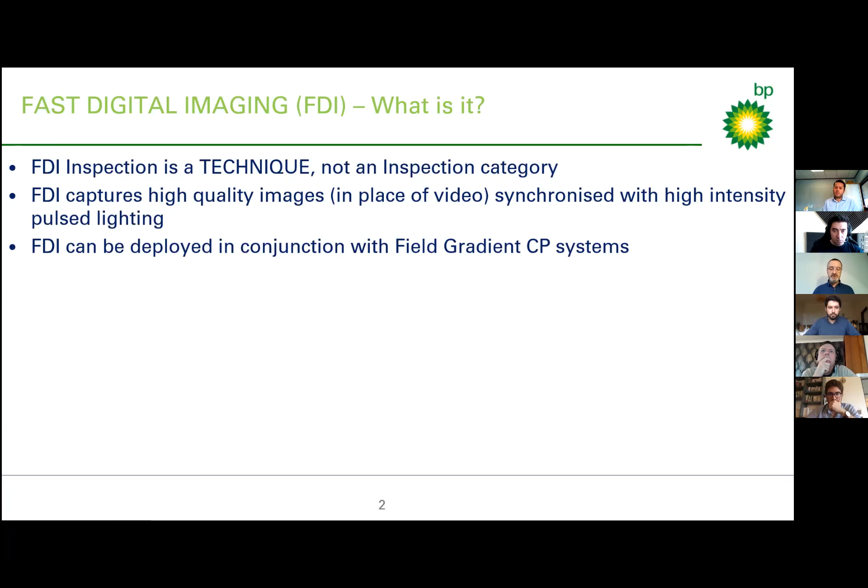So what is fast digital imaging? Fast digital imaging is a technique, not an inspection category. Fast digital imaging captures high quality images, stills images in place of video, synchronized with high intensity pulsed lighting. Fast digital imaging can be employed in conjunction with field gradient CP systems. The point being field gradient is non-contact, so you don't have to stop the inspection program.

Fast digital imaging can acquire data at up to 8 kilometers an hour. Data is acquired in a single pass, processed and reviewed after the acquisition cycle. Fast digital imaging may be configured for general visual inspection, referred to as GVI, or fast GVI, fast general visual inspection, by adjusting sensor configuration and geometry.

Fast digital imaging is ideally suited for fast ROVs, AUVs, work ROVs, or remotely operated combination unmanned surface vessels and underwater vehicle systems, which is certainly the perceived future direction. And fast digital imaging, because of the nature of the data that's acquired, is ideally suited for automated event and anomaly identification and classification.

So within BP, and I think within the industry in general, there's 5 inspection categories: pipelines, jackets, risers, and hardware. And each of those has a component that may be requiring horizontal or vertical inspection, and also operations within 500 meter zones. And obviously all water depths from the beach to the deepest asset.

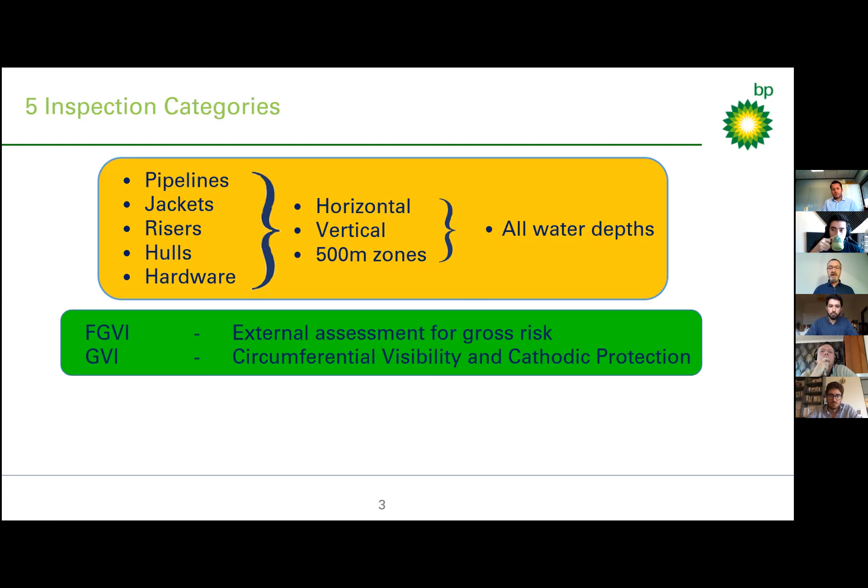So fast GVI is roughly an external assessment for gross risk to the asset, whatever that asset might be. Whereas GVI, a general visual inspection from a pipeline perspective, requires a much greater circumferential visibility of the pipeline or the structural member, and potentially monitoring of the level of cathodic protection that's afforded to the asset by the protection system, whatever that might be, anodes or impressed current. And fast digital imaging has become BP's preferred method for performing underwater asset inspection.

So BP now has a specification that outlines the minimum requirements for fast GVI and GVI, and they're quoted in o'clock positions rather than coverage. Fast GVI requires a minimum of 9:30 to 2:30 o'clock coverage. That essentially means about the top 160 to 170 degrees of the pipeline plus seabed either side.

GVI requires a greater degree of circumferential visibility, 8 o'clock to 4 o'clock is quoted in the documentation now, but also sufficient overlap information to create three-dimensional models, either point clouds or surface models. And again, the pipeline either side, the seabed either side.

So BP has now a track record of performing 6 fast digital imaging campaigns globally, and globally meaning North Sea, Trinidad, and Azerbaijan, Georgia, and Turkey, or the Caspian region, with varying degrees of coverage and speed acquired.

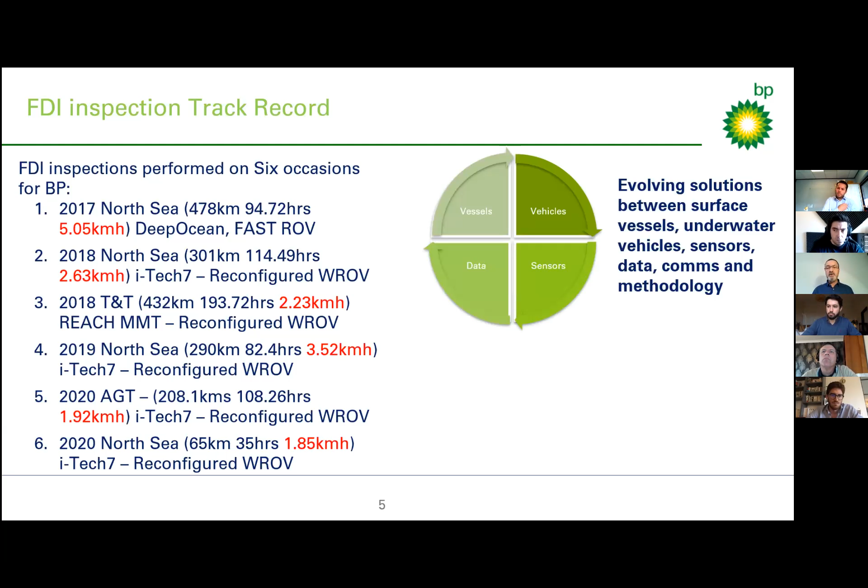And we see the still evolving solution between the type of data that we require, the sensors that we need to acquire that data, how we mount those sensors on the underwater vehicles, and potentially how we operate the underwater vehicles from surface vessels, manned or unmanned. And this is where a lot of remote operations comes into the equation.

Fast digital imaging delivers quality products that we are trying to, through continued use, standardize and normalize within the industry. And BP now is certainly not the only company that's using fast digital imaging as a data acquisition methodology.

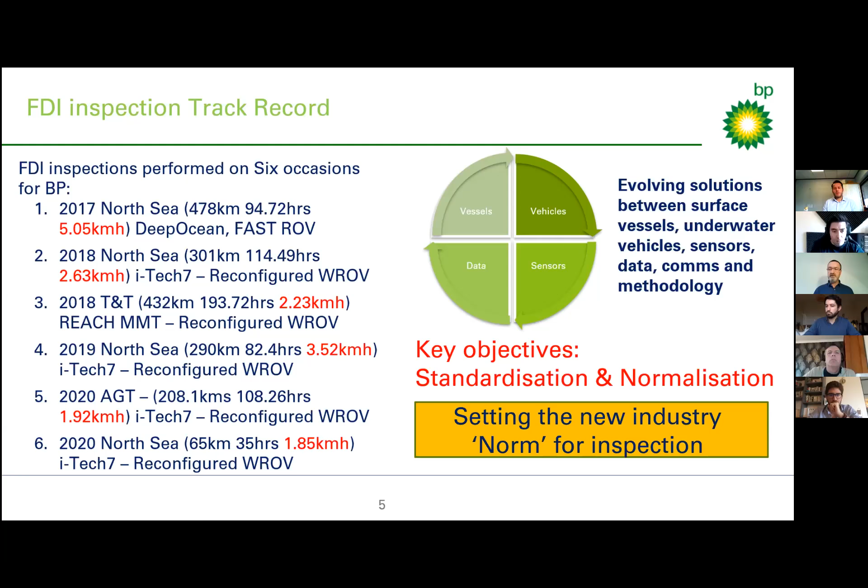Effectively, we're aiming to set a new norm for inspection, moving away from videos, contact CP, and much slower, laborious data acquisition methodologies. Fast digital imaging also impacts BP's vision within the low carbon agenda.

Within the 6 campaigns conducted to date, 62 vessel days have been saved employing fast digital imaging technology. That equates, on a very average 12 cubes per day, to 789 cubes of diesel saved, which equates to 2,052 tons of carbon dioxide not released into the atmosphere.

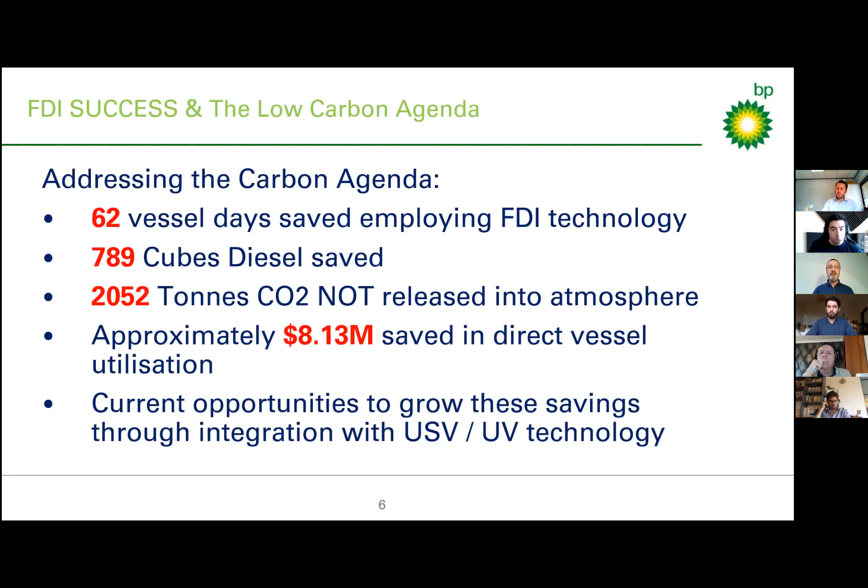Additionally, the saving of vessel days equates to approximately $8.13 million saved in direct vessel utilization. And there are current opportunities to grow these savings through integration with unmanned surface vessels and underwater technology, integrated underwater vehicle technology, and the whole sphere of remote operations.

So a quick outline now of the types of inspection that we require, fast GVI in this case, and the type of history that we've got.

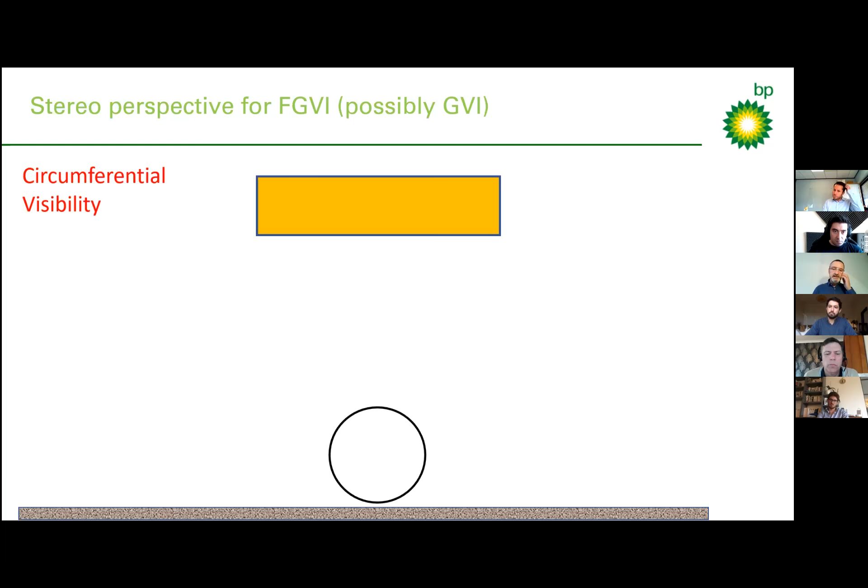This is largely not to scale, but the baseline between the port and starboard acoustic sensors is about 90 centimeters, less than a meter. One of the benefits of an acoustic system is that we can see the pipeline without needing a viewpoint from 2 perspectives.

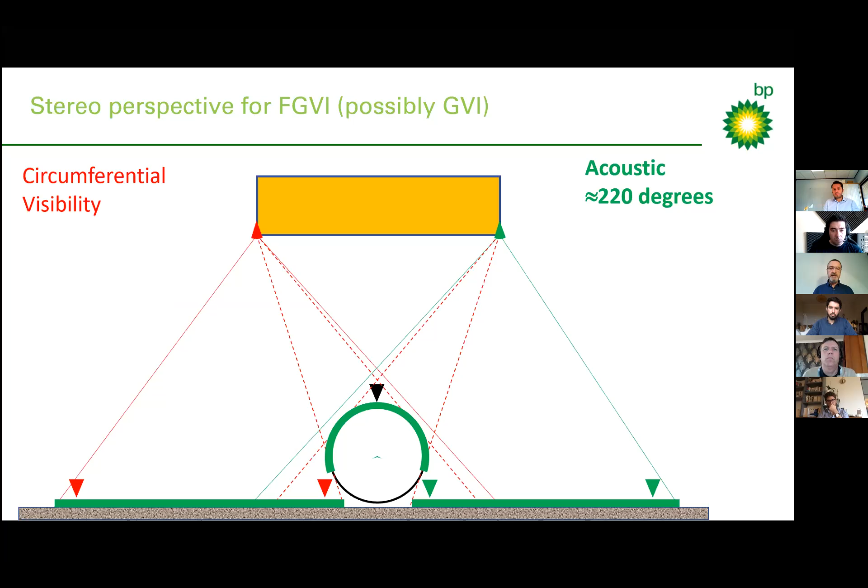So the acoustic coverage with a pretty minimal baseline and a low flying altitude is still fairly good with an acoustic multi-beam system, about 220 degrees. You can pick up your 5-point profiles quite adequately using that technology.

Photogrammetry, i.e. with the stereoscopic images, if the cameras are placed in the same location, can actually only yield a far smaller field of vision, a model. The reason for this is because you can only see or model what both cameras can see.

So if you just take the rough perspective of the port and starboard cameras there, you can actually see by the dotted lines that there's a minimal area of overlap of both cameras.

Stills imagery, also taken from a single perspective, i.e. in this case the starboard camera, is distorted and offset from the model. So although we can get great results with this lower, shorter baseline between our sensors and a low flying altitude, there are some drawbacks to it.

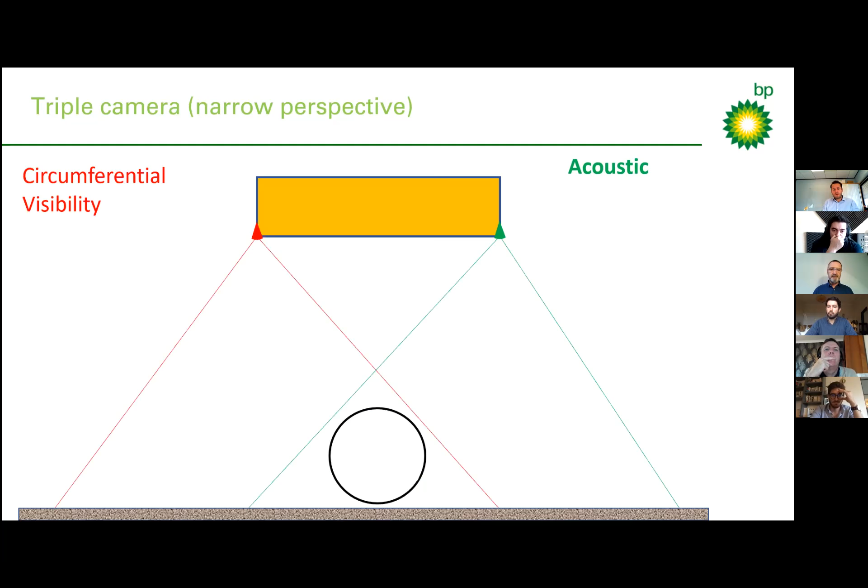So if we now look at how we can improve that, which is now, instead of a stereo, we've got a triple camera perspective. So we've got the same acoustic coverage, same 5-point files, but this time, if we put a center camera in it, we've actually got much greater photogrammetric cover.

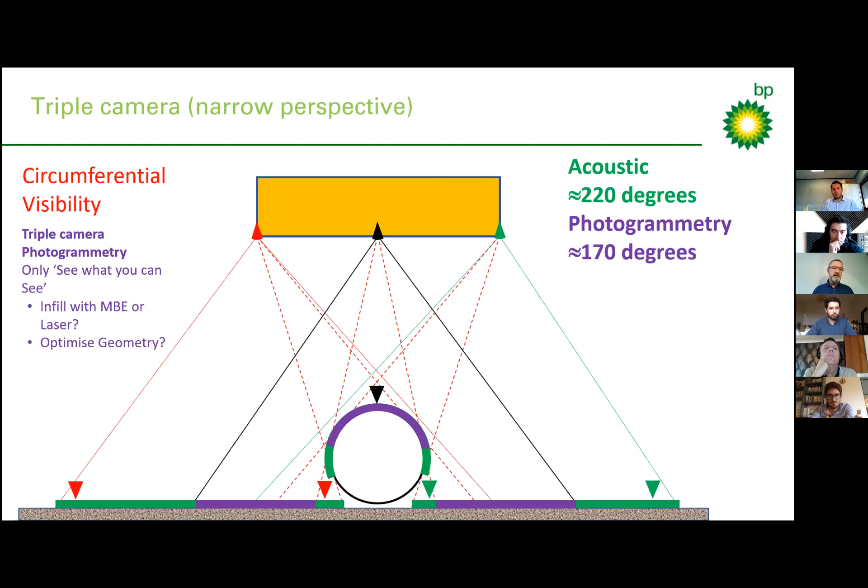So we have a triple camera, and you can see the field of view, the overlap between the images is greater using triple camera. It's in the order of about 170 degrees. And again, the motto here is you can only see what you can see.

The stills mosaic and imagery mosaic for the 2D geotiff, basically the plan view, is now a lot more symmetrical, meaning there's far less distortion, and the overlap is significantly improved to give you a much wider corridor of visibility.

What the challenge we still have with this rather short baseline, this approximately less than 1 meter baseline, is actually looking underneath the pipe to see what happens in the transition zone between the seabed and the pipeline, as indicated by the red circles. So the way we improve our visibility here is to, bear with me,

broaden the baseline to what we have determined through experience to be about 2.5 meters. We've still got the triple camera perspective. The multi-beam coverage is adequate, but with the larger perspective, we get slightly more photogrammetric coverage for derivation of photogrammetric extracted point clouds or surfaces.

We also used pulse lasers and lighting at the outer camera locations to get more coverage in this area, and we have a stills synced forward camera. A lot of this is to do with providing the pilot information, because now the pilot is not navigating through video, as they could potentially be above the pipeline, out of visibility.

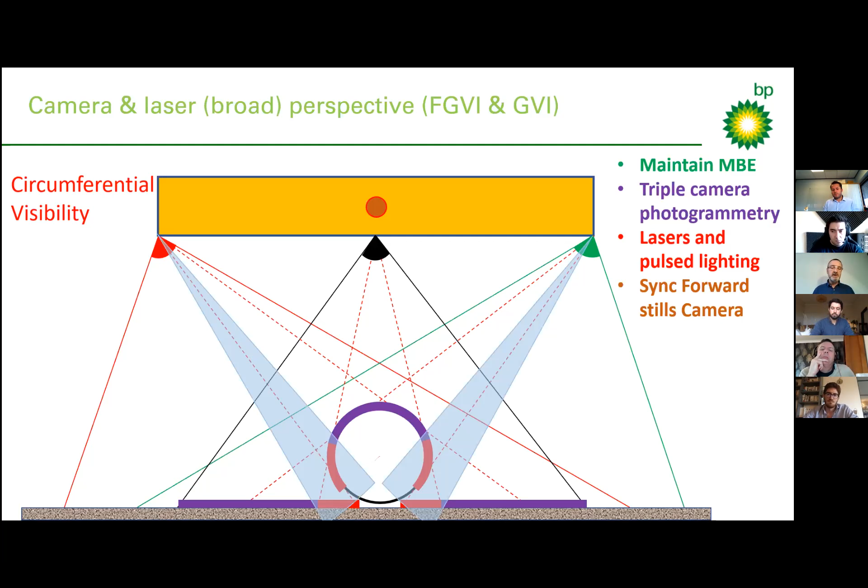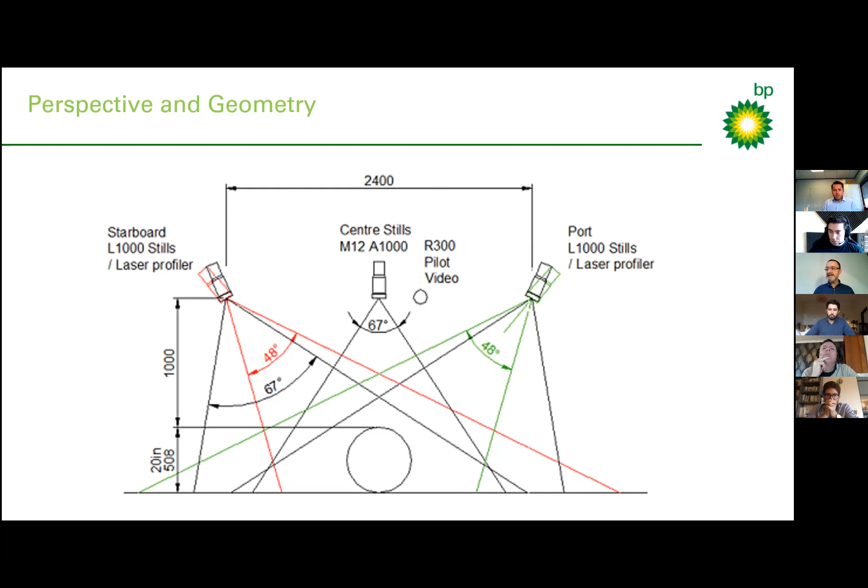We're also looking at how we're going to move this technology into unmanned and remotely operated systems. This is a schematic of the actual setup we use for our inspection. You can see the outer port and starboard cameras are tilted inwards.

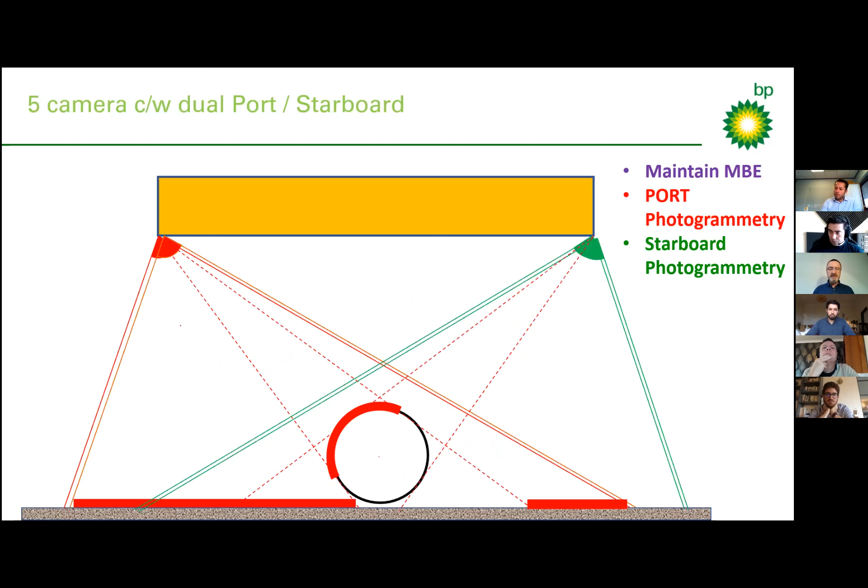There's one scenario that hasn't made any industry ground yet, but we're looking at it for good reasons: a 5-camera dual port and dual starboard perspective, which removes the need for lasers. The port camera gives adequate port stereoscopic visibility, the dual starboard camera gives good starboard photogrammetric coverage, and the center camera gives great 2D overlap for creating the overall geotiff.

So this geometry provides everything we need, full coverage, which allows us to go full velocity through the inspection cycle, plus a synced stills forward camera.

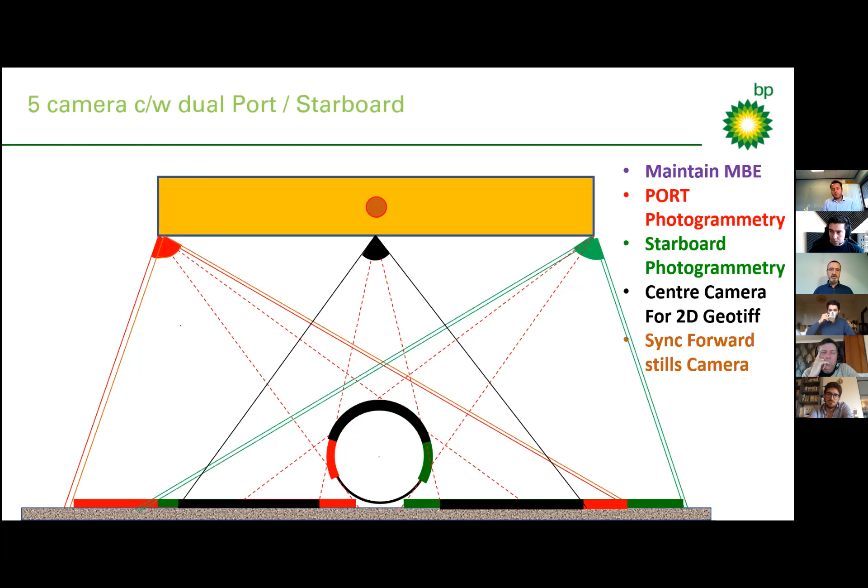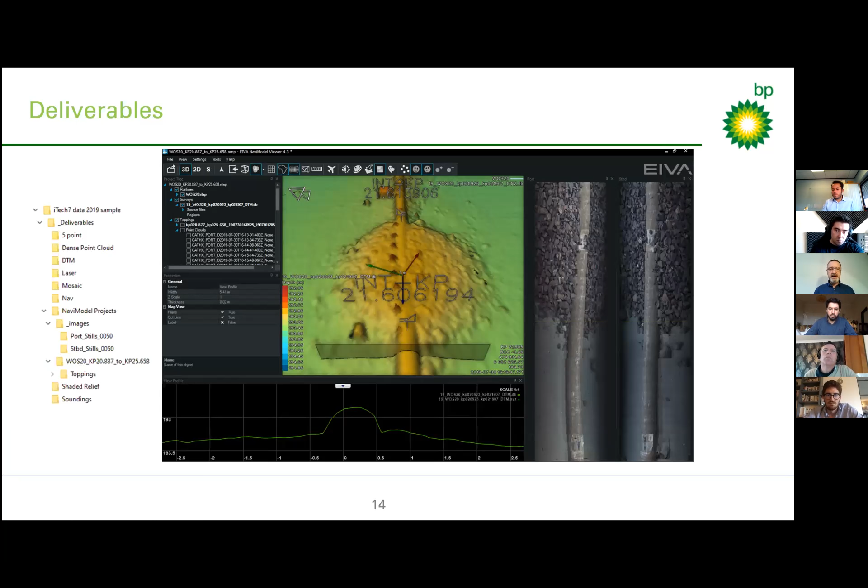The deliverables are in a single format accessible within the BP corporate data store, but also allow the user to interface, gather the data, and look closer at events and anomalies as required.

The detail in this extracted points cloud model is phenomenal, very high resolution, high quality data. The 2D georeferenced ortho mosaics are very highly resolute as well, probably more resolute than I'm actually presenting on screen. As you can see, just zooming into a starfish in this case.

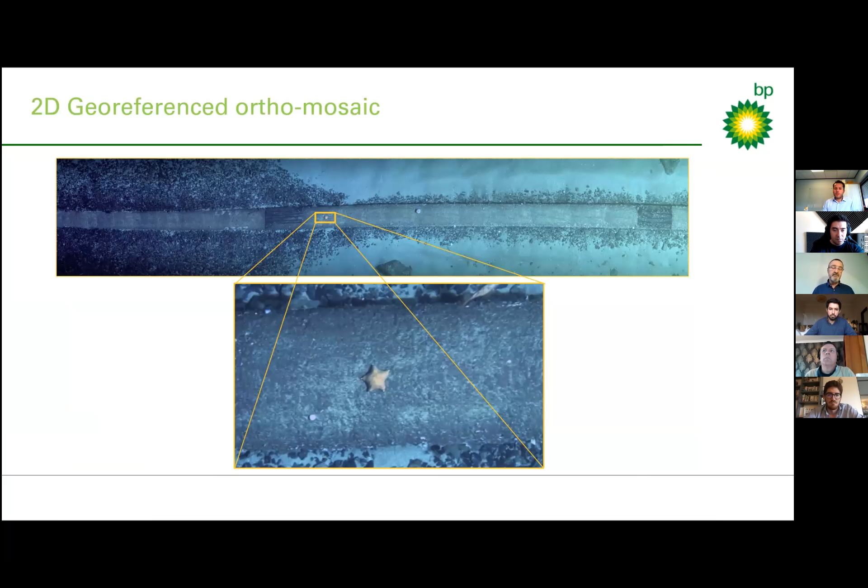If that was damage or debris, as well as potential scarring, anchor scarring, or dropped objects parallel to the pipe, it's easily identifiable and accessible and viewable within almost anybody's corporate data store. We've moved this on to structural inspection as well.

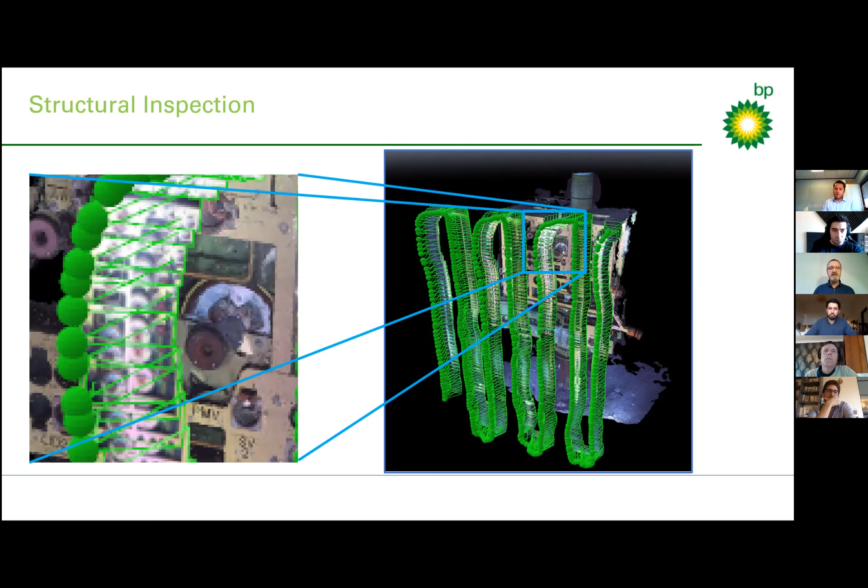Again, we have a three-dimensional model in the background, and each of those green dots represents an image. Unfortunately it's low resolution because it's a poor screen capture, but you can see the principle is the same, for a vertical inspection.

For vertical inspections, we're looking at techniques such as visual SLAM, visual simultaneous localization and mapping, and structure from motion, because the relative precision between cameras isn't necessarily derived through positioning. That might be the first iteration, but it's actually defined by identifying common points within each image.

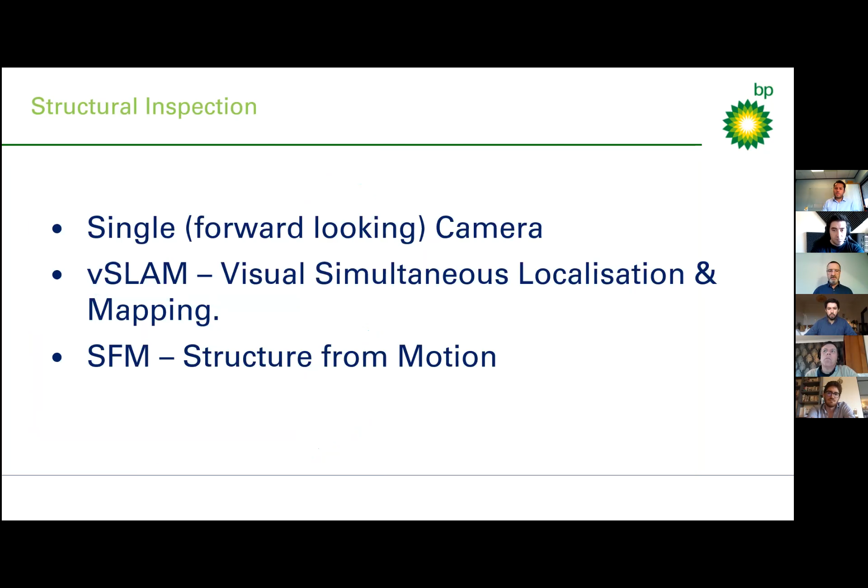A couple of minutes, Eric. A couple of minutes. Thank you, Walter.

Primary takeaway messages: fast digital imaging is BP's preferred technique for inspection, across all categories. Fast digital imaging is a data-focused Renaissance technology, meaning it meets requirements through detailed discussions with integrity engineers and asset owners. It delivers products compatible with BP's, and I suggest other operators', corporate data stores. In BP's case, this is the OneMap environment.

Fast digital imaging and USV, unmanned surface vessel systems, lower the carbon footprint and lower risk by removing persons from the field. Ultimately, BP will review and implement advanced and alternative inspection techniques to further increase inspection efficiency.

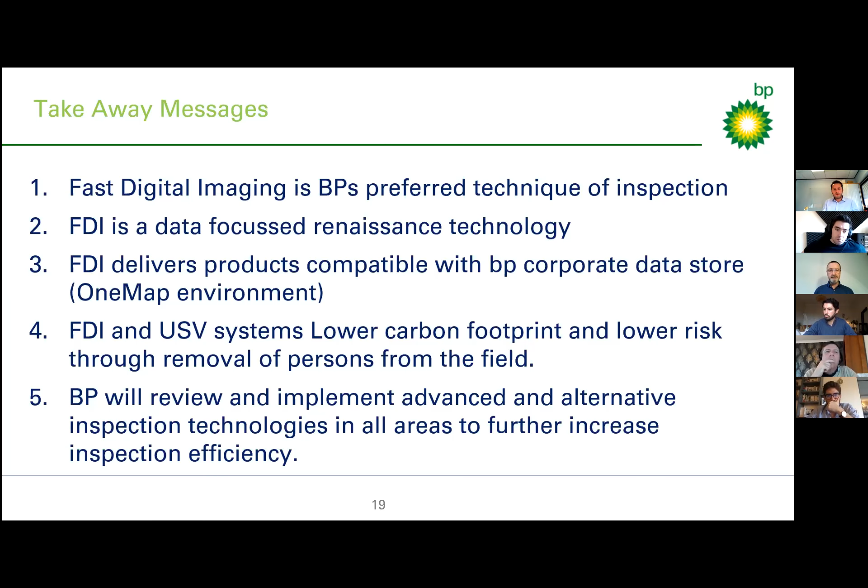Thank you very much. Time for questions.

Excellent, Eric, thanks very much. Very slick and good timing. Daryl, I don't know if you want to kick things off, have you got some questions? I've got a few myself, but maybe you want to have a stab, and we have our other presenters who may have a question or two. So we're going to open up to the floor, and maybe we'll start with Daryl and see what he has to offer.

Yeah, so Eric, very good presentation and very interesting. I'm interested on the lighting side, because you've shown some fantastic images. Is this strobe lighting? Is there any challenges with providing that lighting? And then also, can you discuss the benefits and disadvantages of using lasers over additional cameras, in association with the lighting?

Great questions, both of them. And you're right, I touched on them, but I certainly didn't give them adequate time through that discussion.

Lighting is absolutely critical, and that's why it has to be synchronized. Every image has a synchronized pulsed high intensity strobe lighting. I don't know the actual lux intensity of the light, but it is adequate. That is actually what delivers the result, not just having a high resolution camera.

You really have to get that lighting pulsed at the same time. The challenge with lighting, the reason it has to be synchronized, is because the lighting is relative to the perspective of the camera being used. For example, if you're out of sync, you flash on the starboard side but the camera takes on the port side, you'd end up creating a shadowing effect and significantly degrade the image. So lighting is key, absolutely key.

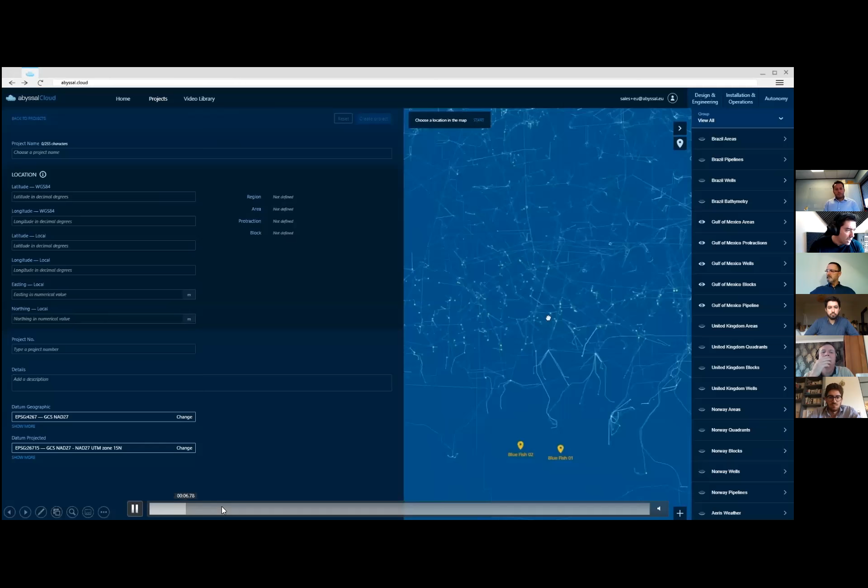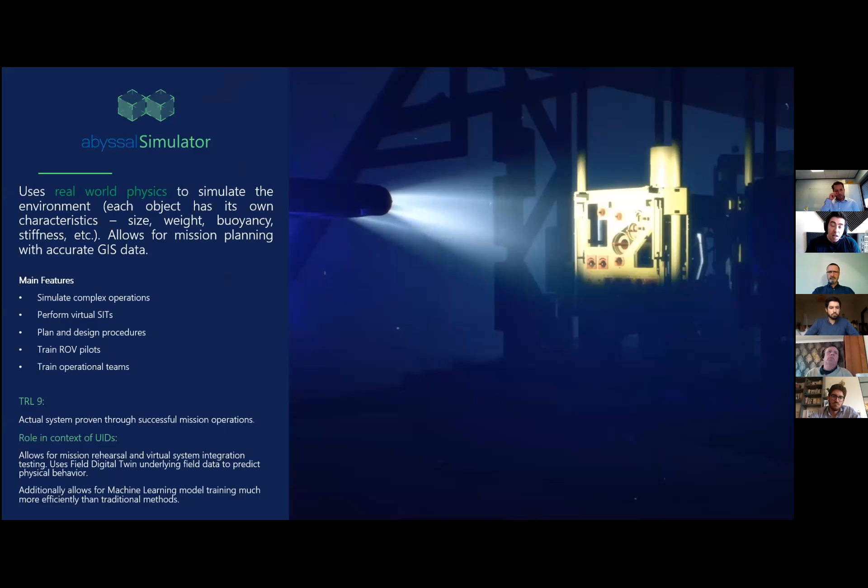So moving a little bit on, this is how now we have a digital 3D version with GIS capabilities very accurately. Now we can move on into the simulation component. This is where we plan operations before even going offshore. We're using a physics engine, based on that GIS and CAD data, and also data that we extract from the AI components.

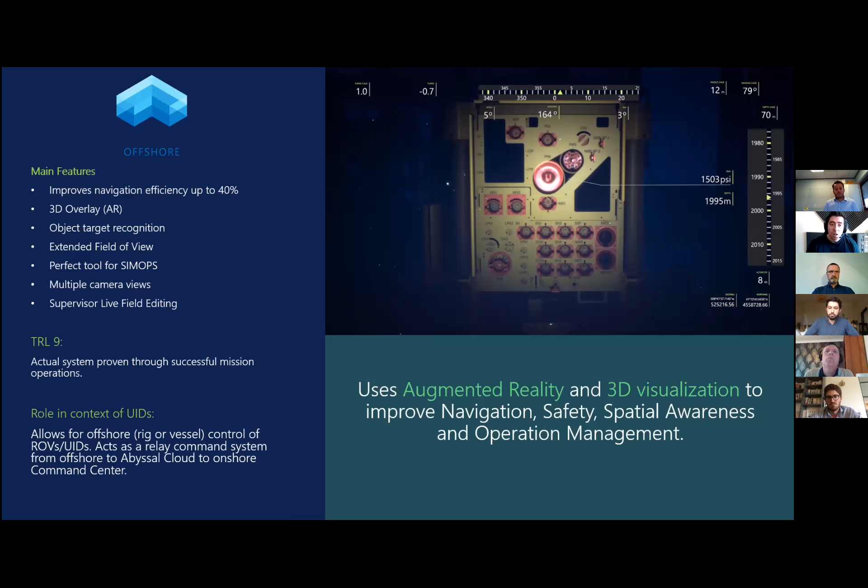When we go into execution, this is where the operation actually takes place. We have a kit that's installed near the ROV control room. This is where we do most of our operation management, but also that's where we correlate video and data sources with the telemetry. Those kits are sending information via satellites to our cloud, and inside that cloud, the data is being correlated together, and this is where the AI comes in.

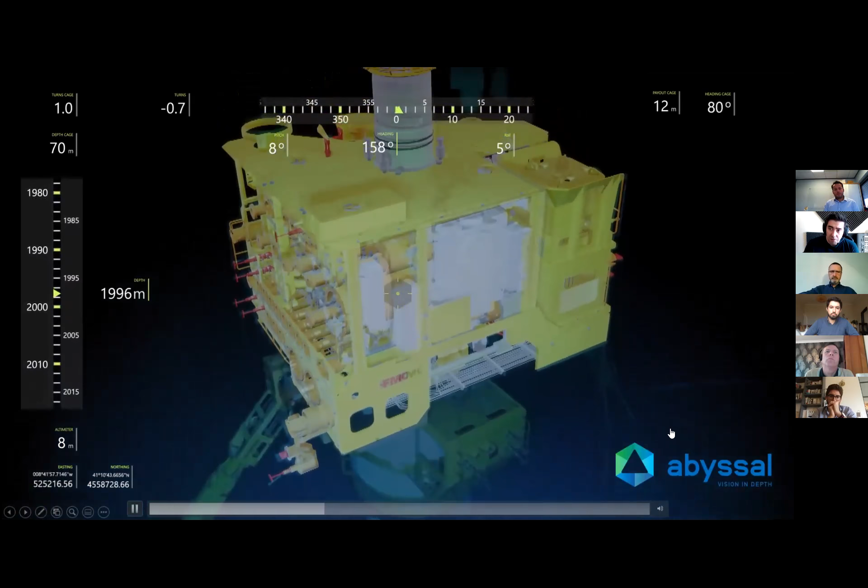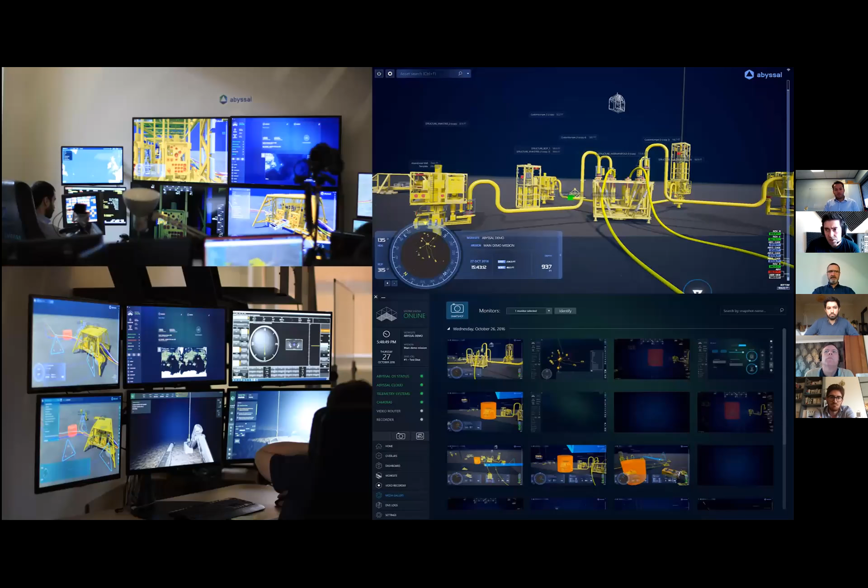So the capture process is, yes. So we're doing the operation live offshore. How can we extract data that's already on the cloud? For us, it is a use case of how we use the cloud system to create command centers for our customers. This is an example in BP. This is where we were monitoring an unmanned surface vessel that also deployed an ROV, and we were tasked with monitoring all of this operation.

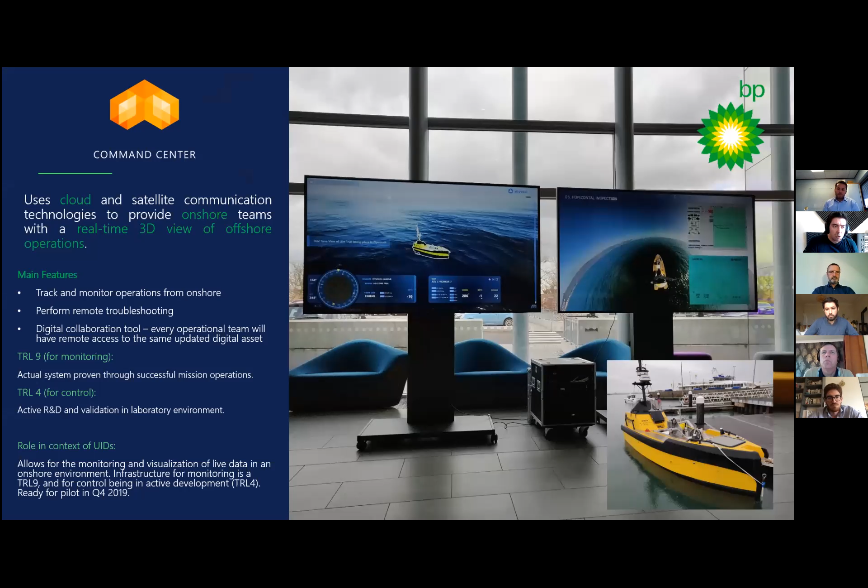So moving on to the processing component and subsea artificial intelligence. What we created was a subsea.ai platform. This is going to be a marketplace for machine learning models and annotated data. It's also going to be a faster data annotation platform. And why? That's because we need well annotated data and lots of it, and building those models is challenging.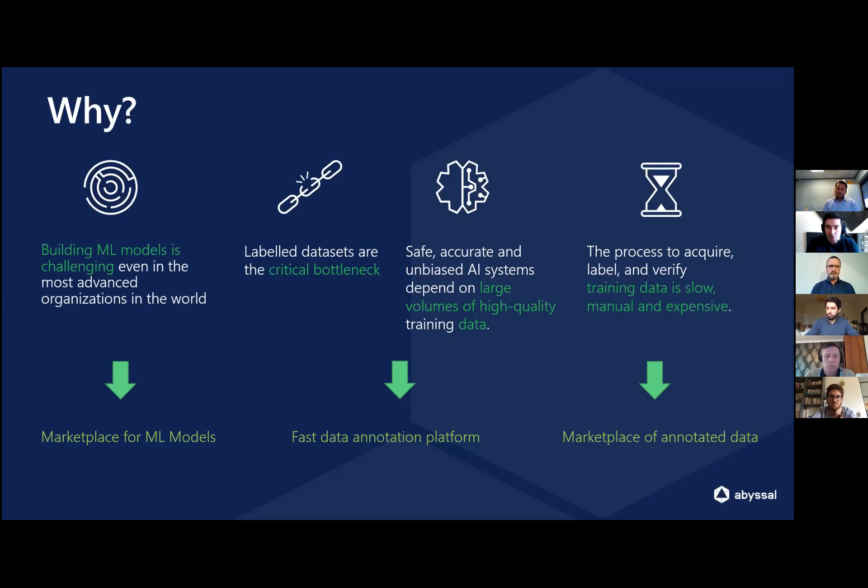So we're going to allow our users to access those models, but also the critical component, the bottleneck of creating AI models, is labeling and annotating data. So we created ways of making that much faster, actually 80% faster in training AI data. So this is how we do it in that subsea. I'll give you lots of examples after these slides, but we essentially collect the data by post-process.

We can take legacy videos from our customers, so essentially terabytes of videos, and we then create tools for our users to annotate, to create all sorts of different models. And then we help our users train the model and contextualize the result in a 3D environment. That could be volumetric reconstruction, which I'll show you. So these are the examples that we've done in the past in all sorts of situations.

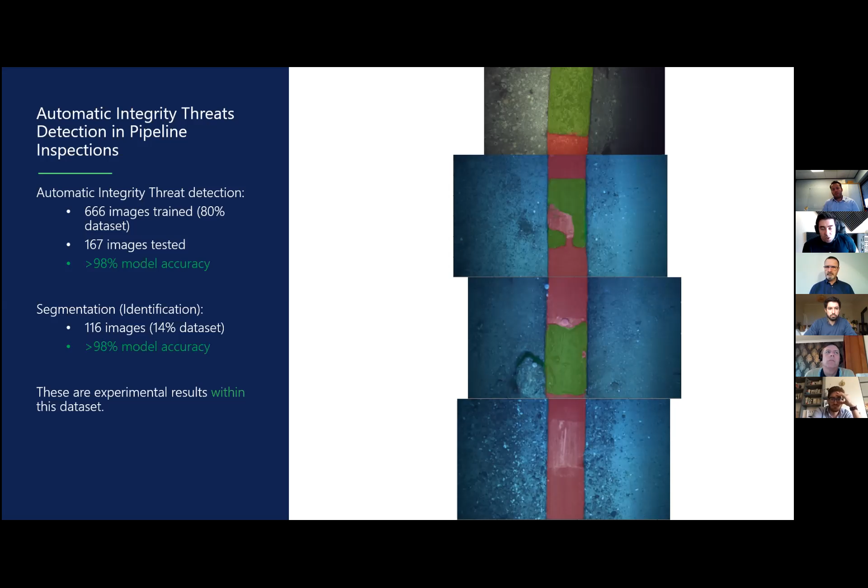One example is automatic integrity threat detection. In this case, we are detecting with 98% model accuracy integrity threats in a pipeline inspection. So we're saying, is there or isn't there an integrity threat in this image? But we're also segmenting with 98% model accuracy where that asset integrity threat is. So green is bad, red is good. You'll see the coating on that pipeline as an integrity threat.

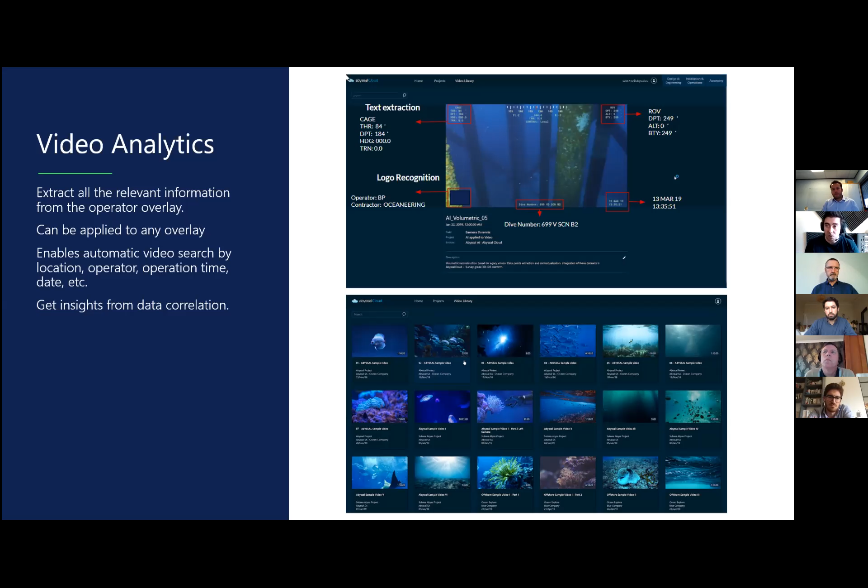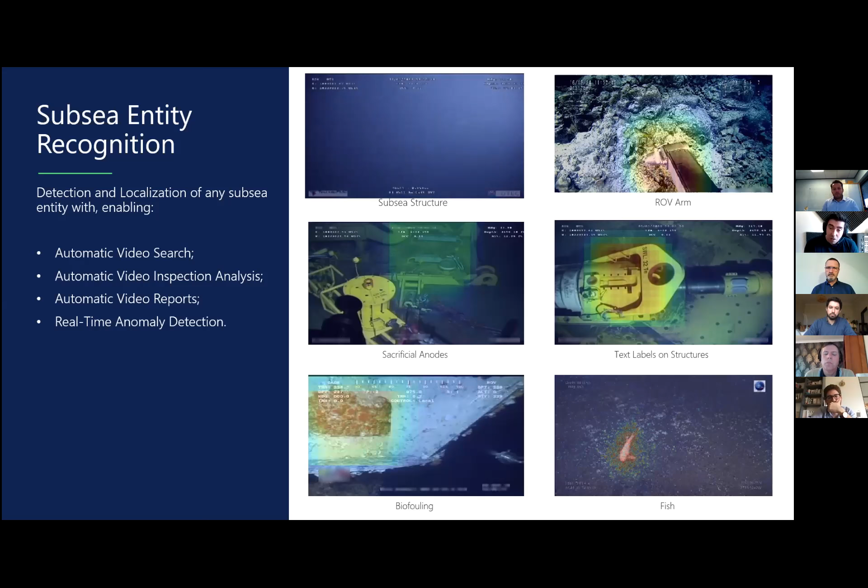We specifically took on the challenge of creating AI models in which we could identify fish on screen, because it's a hard thing to do. Finding a yellow structure in a black background is easy. Finding fish with all different shapes and sizes is difficult, and that helps move the technology further on.

So in this example, this is going to be you against an AI that finds fish on screen on the top side, and the AI will begin searching for fish and will give you a probability cloud when it has a statistically high probability of being a fish. It already found a fish.

So in this case, I'll move a little bit forward. So there's a fish there. Obviously, this is a biased and just interesting situation. Normally, the AI will find a fish as fast as a human, but this is important in the next slides. This is also important in an aquaculture setting.

Say again, Daryl? 5 minutes. That's fine. Thank you.

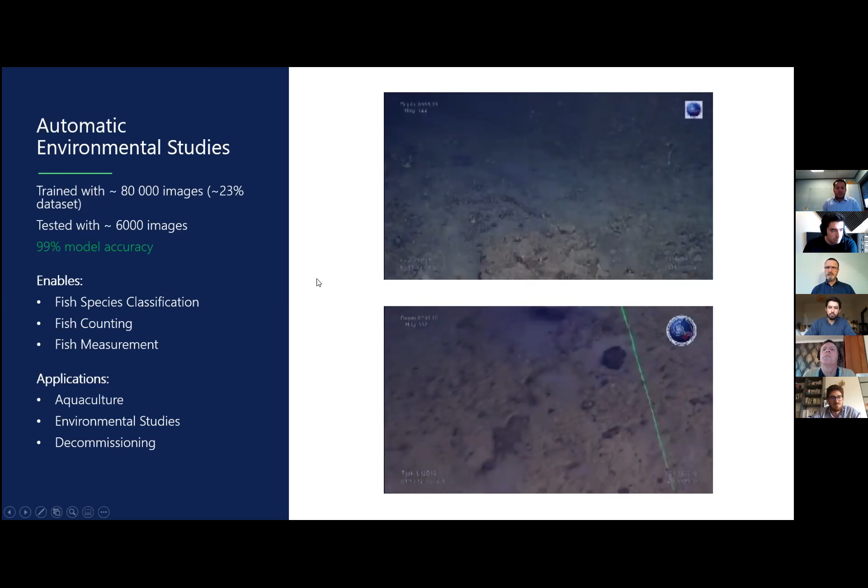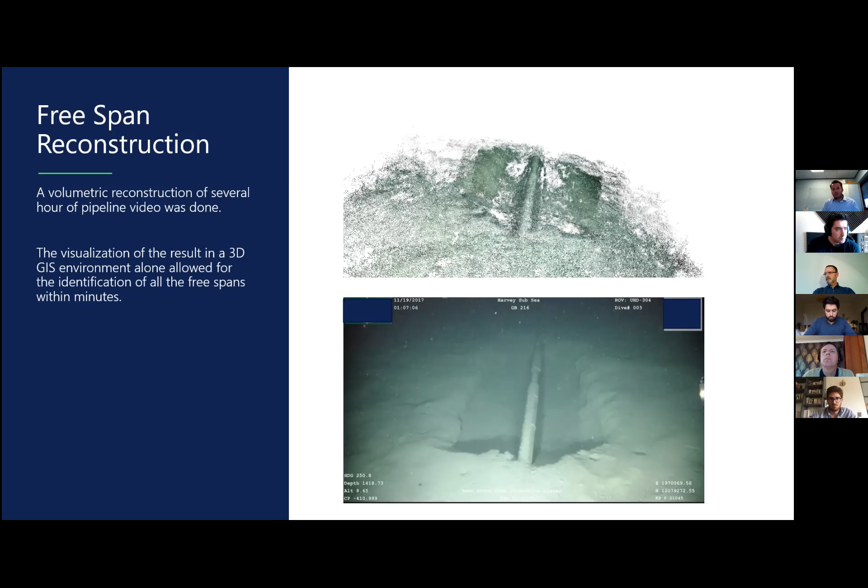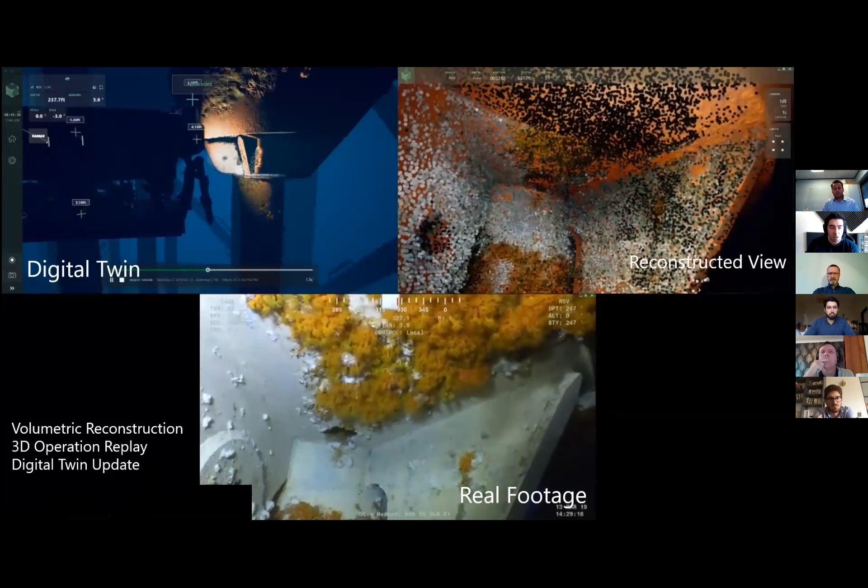Another real world example of multiple models combined is this. We were tasked with only having this video. So the real footage is the only data that we had. With this data, we volumetrically reconstructed what we're seeing, and what you're seeing is the point cloud reconstructed on top of the original CAD model. The difference between the point cloud and the CAD model is the thickness of the marine growth. So we were able to automatically reconstruct and analyze the marine growth in this imagery.

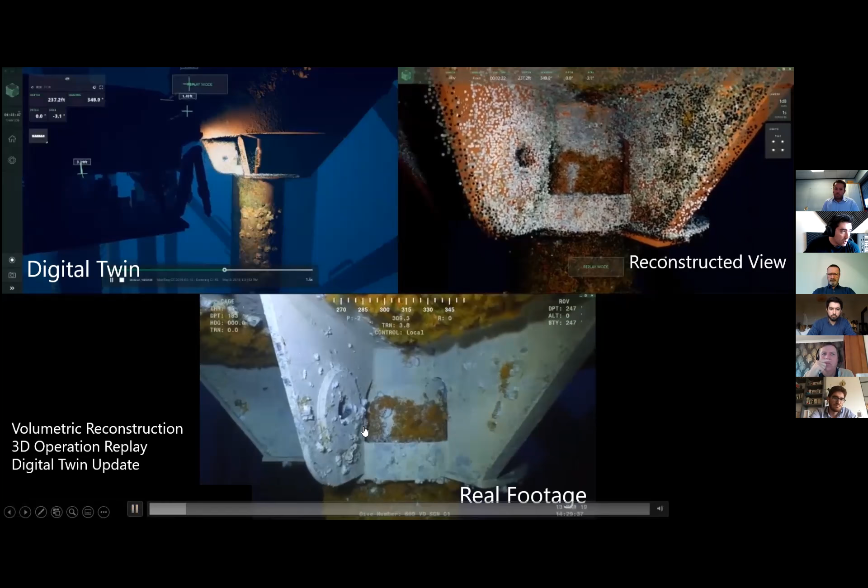At the same time, we're also able to estimate the position of camera movement based on video, so that we could estimate the position of the ROV within 1/2 foot of accuracy, because beneath the spar there's no positioning available. We also did analysis on this metadata. So the result is the reconstruction of everything we saw, and the reconstruction of the operation itself.

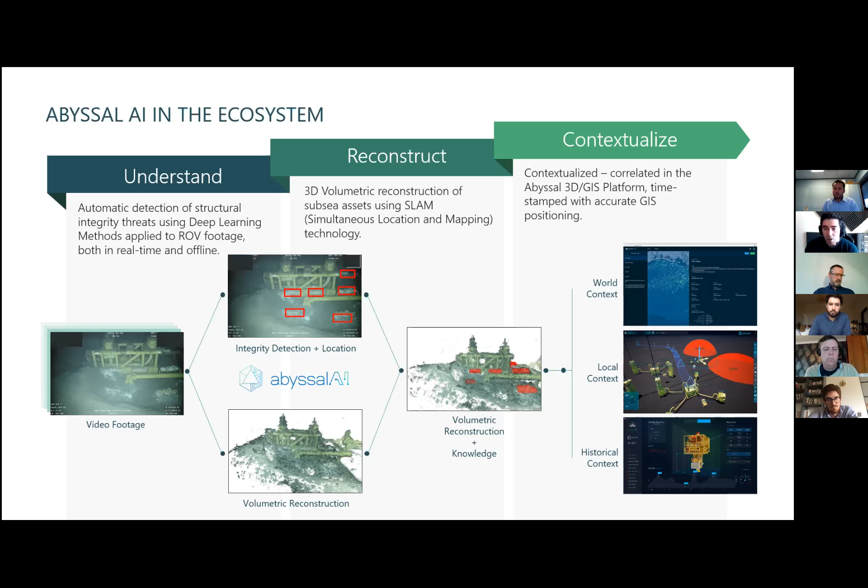Let me see if I can move the slides here. So with all of this information combined, there's lots of things we can do by combining the different machine learning models. We can take a year worth of video, reconstruct the scene, but also identify each different component and categorize those components. And then by using other machine learning models like automatic status identification of anodes, we can identify every anode that's under a certain threshold on a specific field by using legacy data, along with many other applications. So this is about it.

I'm open for questions. Well, thank you. That was an excellent visual presentation, really quite interesting. I'll let Walter start with questions this time, as I hogged it last time. That's okay. Yeah, thanks, Daryl.

Yeah, really interesting, Manuel. Some fantastic imagery there, and I think certainly this is the way the industry needs to be going. Fabulous. I have a survey background, so my interest is very focused on the spatial aspects. Now, clearly, you're integrating large volumes of quite disparate types of data. You mentioned legacy video data that may have legacy positioning systems on board that may or may not be great.

You presumably are integrating 3D laser scans from structures done in the fab yard. You've got as-built data to try and tie in, which will be subject to errors depending on the water depth and the positioning systems used, etc. And unless you integrate all of those systems accurately, there's a danger that the results are not valid for volumetrics, for distances or changes in between periods of time where the systems you've used to collect the data has varied.

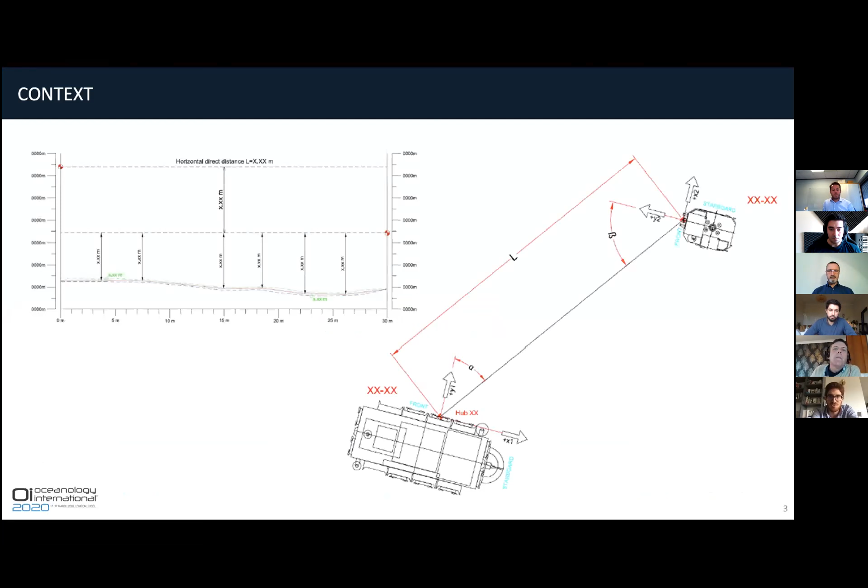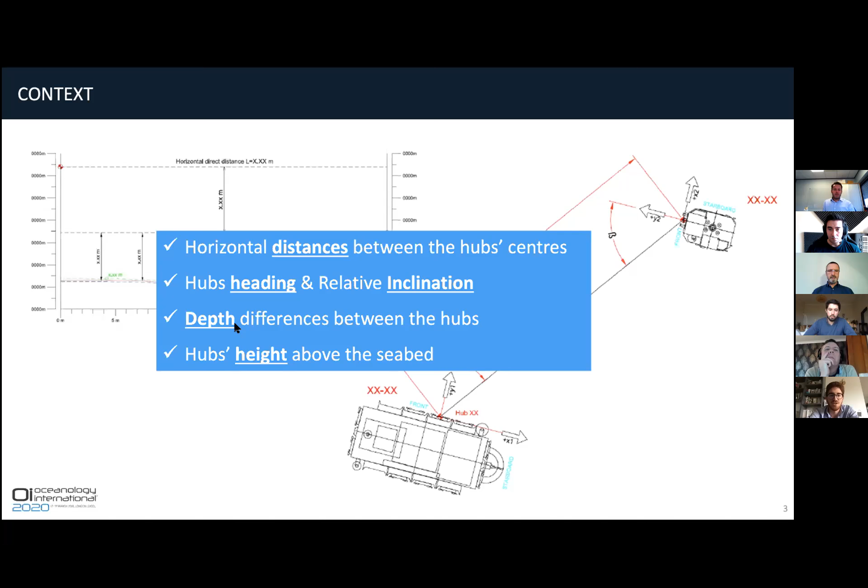So just the context, of course, you all know metrology and the need for precise measurements between two structures. Usually what you want to measure is distances, heading, and relative angles. So it's relative between one structure and another, and accuracy is really key. The concept we developed really started from bringing technologies and technology breakthroughs together.

The first is realizing that new LBL networks made huge progress, and the rise of sparse LBL is bringing nice solutions to the market because it means you can have the same accuracy with fewer sensors. Then 4C, we bring the Atoll ROV, which is a smart tool that can deploy LBL frames on the seabed from very light opportunity vessels. And this is something I will introduce.

And then several photogrammetry techniques have been improved, and for sure BP and Abyssal also introduced new photogrammetry techniques and new imaging systems. So what I'm going to present today is not just about one company. It's a concept that you can bring together with several techniques. So it can be any LBL sensor, any imaging technique, and of course any ROV.

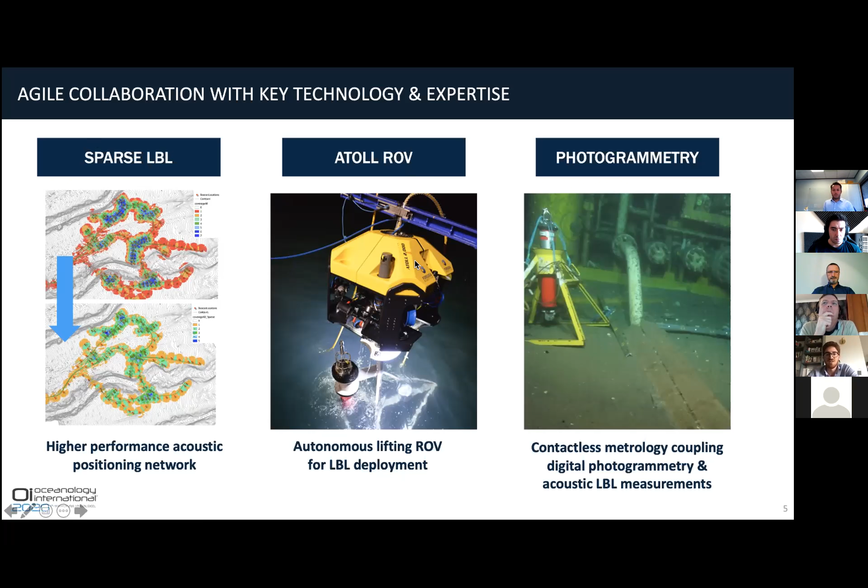But today we do this presentation and concept with 3 French companies. iXblue, which is a market leader in INS and acoustic systems. GeoFit, which is a French expert in metrology, and they have a huge track record with some of the major EPCs in the world. And 4C, maybe a quick word about 4C.

We are a young French company created 4 years ago, and we develop smart hardware for offshore industries. We basically focus on repeatable tasks. So we develop ROVs and vision systems to automate repeatable tasks in the industry. And one of these repeatable tasks is acoustic sensor deployment. So it all started

from an observation by a big French major, realizing that most of the time construction vessels deploy acoustic beacons, and a construction vessel can cost 100K a day, whereas PSVs are everywhere on the fields, and the cost is usually less than 10K a day. So clearly there is a need to shift some operations from big construction vessels to lighter vessels, which are on field, and most of the time the PSVs, the platform supply vessels, are not used, less than 60-70% use rate. And why would you use a 400-ton crane to deploy a 10 or 20 kilogram beacon?

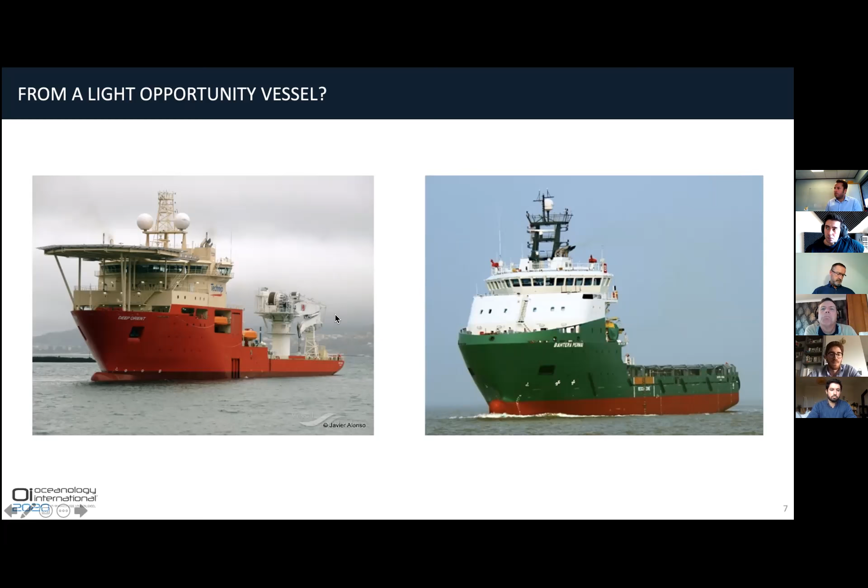So this was really the first observation, and this is why we started to push this Atoll concept, and what kind of tool we can create to deploy an LBL network on the seabed. And the concept I'm presenting here is using the Atoll by 4C that can be deployed from a PSV.

And the first step of the concept would be to deploy a few frames on the seabed, usually 3, and then perform the photogrammetry treatment or the imaging acquisition from the same ROV. And because the ROV has autonomous capabilities, you can imagine a pre-programmed flying path and make the acquisition autonomous. So this is a concept.

I was supposed to present that last February before the COVID started, and we were supposed to organize offshore deployment in the summer. Unfortunately, everything was kind of standby. So I'm still presenting the concept, but I don't have any real data to show you today, unfortunately.

So a quick word about the Atoll vehicle. Atoll is a project we started 2 or 3 years ago in collaboration with Total. So Atoll is a smart ROV that can be deployed from any vessel. So you can see a very light survey vessel. Of course, this would be shallow water here, but you can see the vehicle deploying an LBL frame up to 100-meter water depths. So this was the first trial with the first vehicle design we performed.

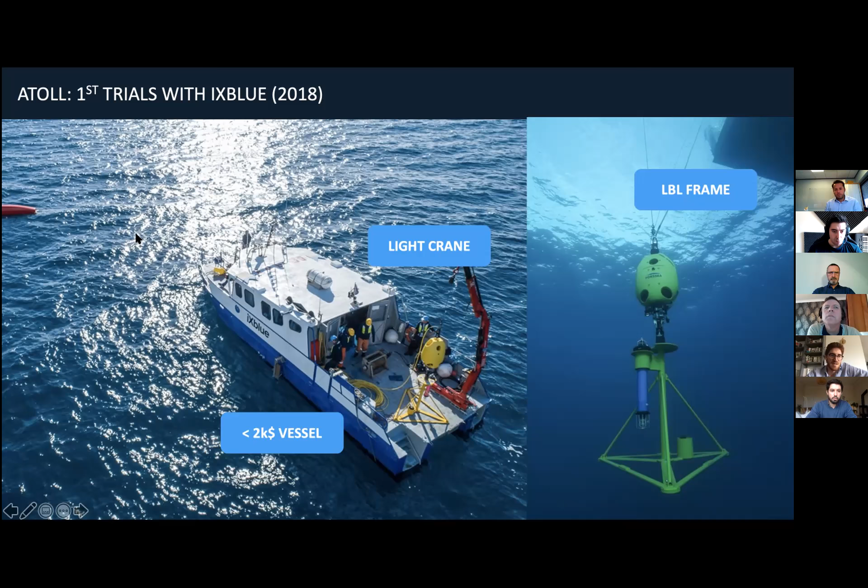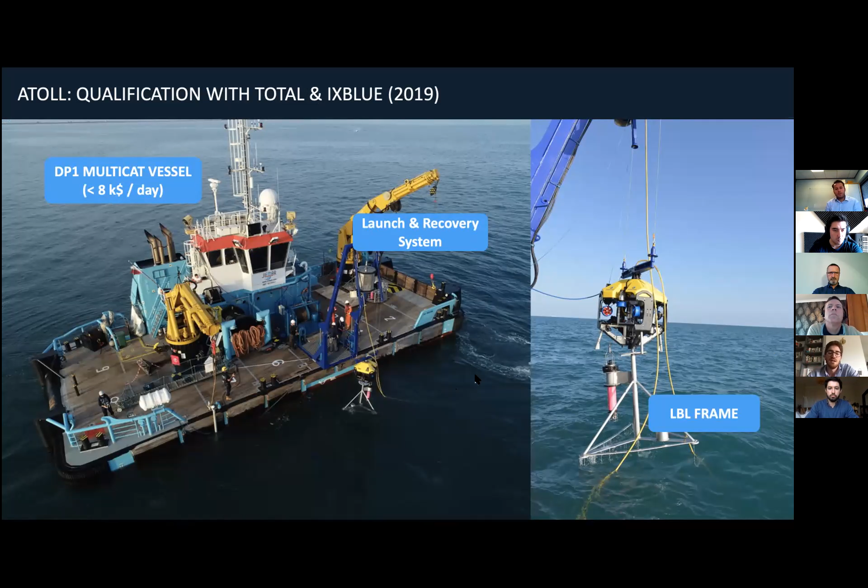And this is a trial from last year, still with Total, slightly bigger vessel, DP1 vessel, and we can reach now deep water depths, approximately 1,000-meter water depths. So the vehicle has its own launch and recovery system. The design has slightly evolved. So let's say the Atoll ROV is an obs class ROV with a hook. It's like a motorized hook and navigation capabilities.

And we have, of course, a very precise positioning. Positioning is key. So we were using at the time iXblue GAPS. Of course, we are totally agnostic in terms of sensors. We can use any acoustic device from Sonardyne or Kongsberg, for instance. And we also perform the boxing with the frames. So just a screenshot of the vessel GPS.

So the first part of my presentation is very visual, but it's just to show you what kind of tool we are deploying in a very operational context. We also developed a remotely controlled latching system that can be very helpful to deploy and recover frames. INS DVL, so the vehicle itself is survey graded, and positioning of the vehicle is very important when it comes to photogrammetry acquisition. And we also have this photogrammetry camera with all the offsets between the ROV reference point and camera controlled by dimensional control.

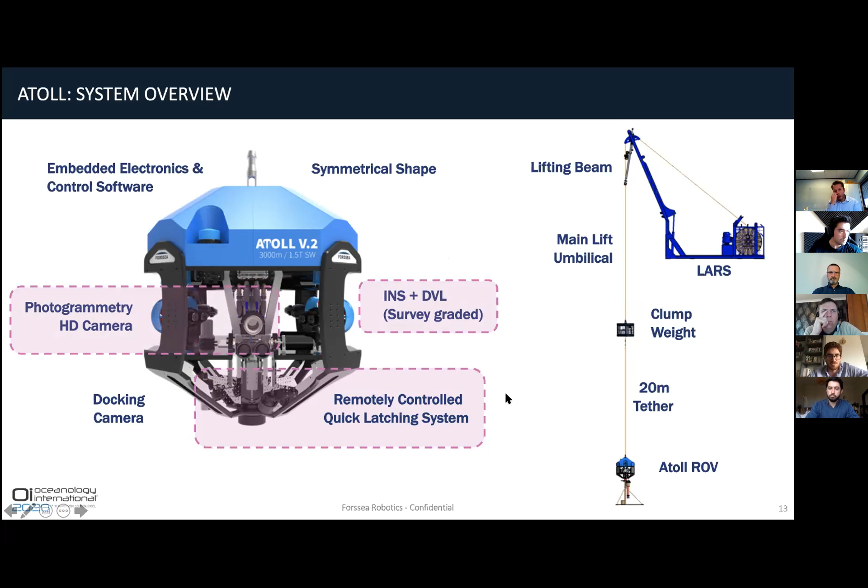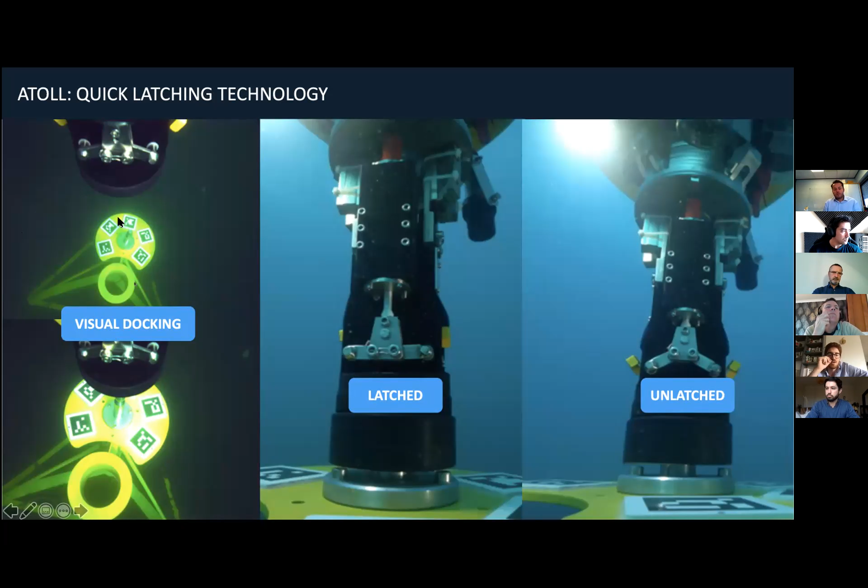It's just a quick view of the latching system. So we can mount a latching bullet on the top of the frame or even on the top of the beacon. Then we use our visual docking technique using QR codes for precise autonomous docking, and we can grab and release the LBL frames. So that's for the Atoll tool developed by Forssea.

And then we started to work with Geofit, this French renowned photogrammetry company. So you're probably more expert than I am in photogrammetry techniques, but basically photogrammetry is the art of creating measures from pictures. And what you need is a camera movement, because, like the presentation from BP explained, you need to see the same point from different images. So these are images from Geofit campaigns.

When it comes to photogrammetry, it's key that you reconstruct your scale with the right tools. So one of these tools is to use a scale bar inside of the image, and then you use the scaling information to adjust your positions. And the other technique, of course, is to use acoustics, but now with the improvements of the SLAM techniques like visual and inertial navigation, probably some of you are already working on using the INS information to rescale the imaging acquisition.

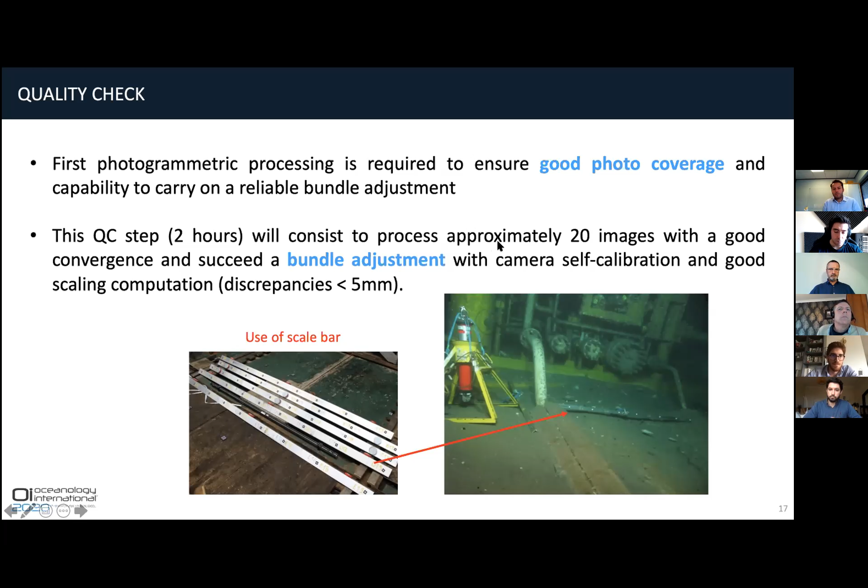These are some images of the Geofit processing, so I won't have much comments. Unfortunately, my colleague couldn't join today.

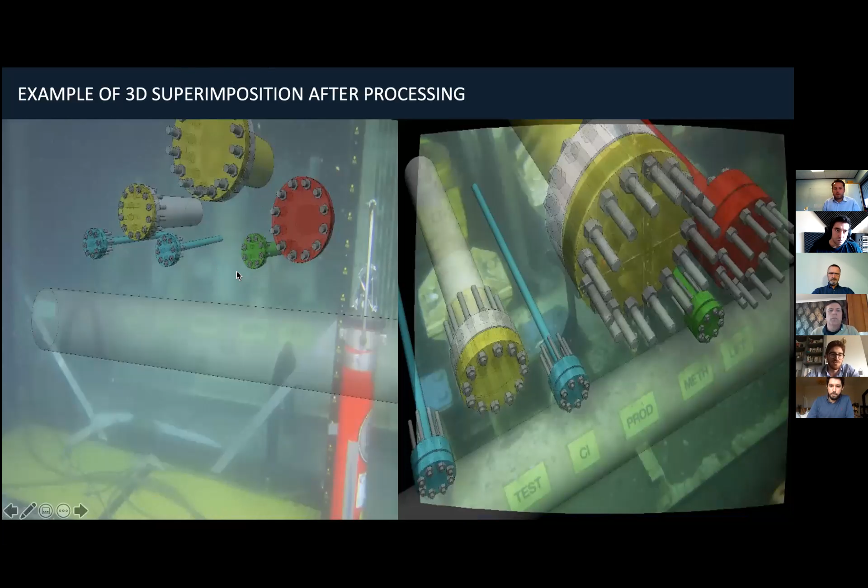But basically, Geofit developed a software where they recognize points of interest, and they can reconstruct 3D images using cross images. So processing is very fast. I know Geofit also tries to put 3D models onto 3D reconstructions. So this is something that can be very helpful as well to rescale your images. So it's all about photogrammetric scaling, like I said.

So this is why when it comes to metrology, usually you expect a centimeter error and maybe 0.1 to 0.5 degree error. So clearly scaling is key. And this is why clients would deploy LBL networks, because as far as I know, it is the only 100% certain and accepted way today by operators to perform metrologies.

I know some visual sensors are coming on the market, a combination of vision and lasers that can perform metrologies. But let's say 80% or 90% of the metrologies today on the market are using LBL because it's a very high TRL, and clients usually have trust in such systems.

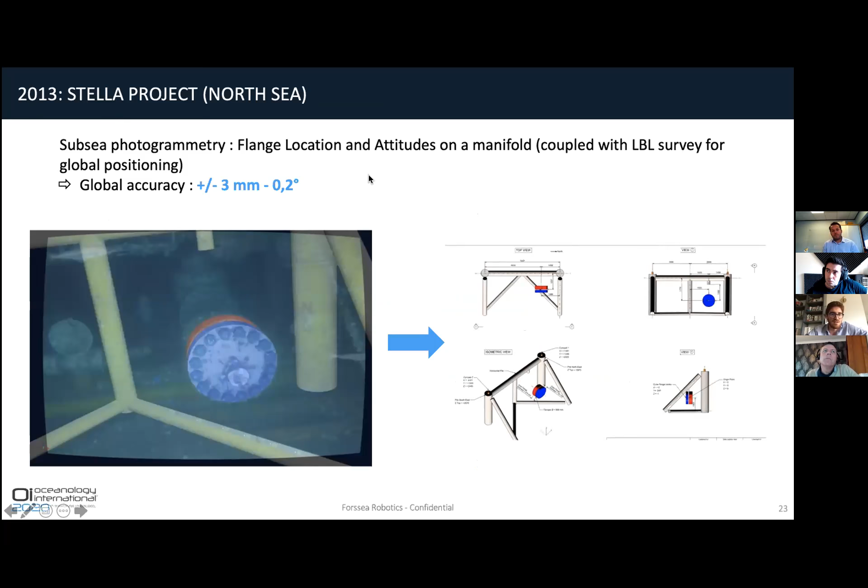So the track record of Geofit, once again, I'm not the best person to comment, but let's say they have a very long track record for the past 10 years in the North Sea. They've worked a lot with Subsea 7, so they did some flange photogrammetry, several metrologies, spool to spool and jumper to jumper.

And they're also one of the first to use new 3D targets for even better 3D reconstruction. The idea here is to put a 3D target inside the metrology receptacle, so you have less requirements for DIMCONs. It's only one target rather than other metrology companies using tens of targets on the structure. So it means less targets and less dimensional control required on yard.

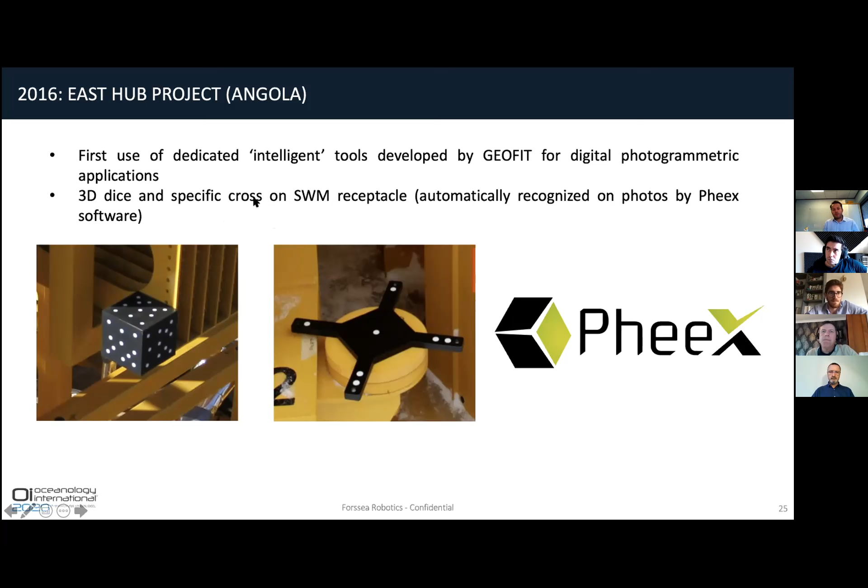And I will end my presentation with a few explanations of what we did with the QR codes, and where our QR codes can be combined with metrology acquisitions and positioning.

So probably you know that QR codes are everywhere now in the industries, and they have started to be deployed even by Equinor on the subsea docking stations, for instance. So this is open source, and that's where it's important that any QR code deployed on the seabed can be used by any operator.

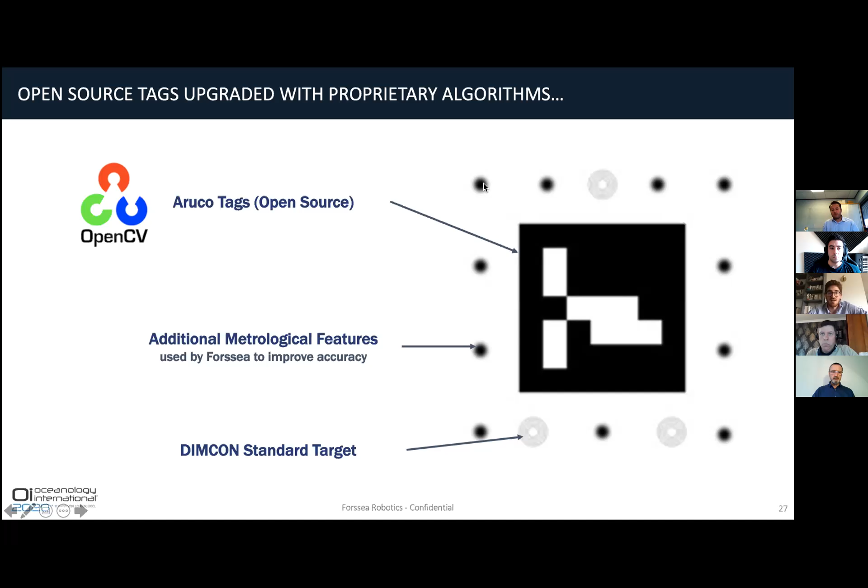But what we did is we added some extra dots around the QR codes. Each dot is a metrological target. And we added some standard dimensional control targets. Thanks to these extra dots, we reshaped all the algorithms. We packaged the algorithm and the software inside a single hardware, so we don't use any topside unit. The processing is done internally inside the camera, and everything is pre-calibrated.

So we created this plug-and-play sensor, and each time a QR code is detected, we derive a very precise 6 degrees of freedom position. So we have X, Y, and Z coordinates between the camera viewport and the QR code, but also these 3 angles.

And clearly the differentiator using metrology targets is the accuracy, because we have 1 millimeter and less than 1/20 degree accuracy with such system, while standard QR codes usually have a few centimeters and a few degrees accuracy with clearly absolutely no control of the error budget.

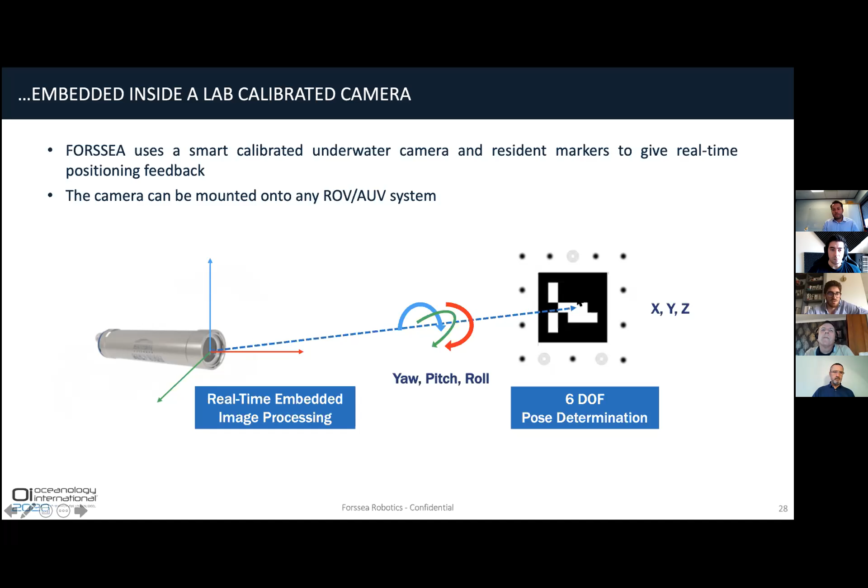So this camera is by itself a real-time photogrammetry system. Of course, we can't... reconstruct the models. It's the first layer of photogrammetry, because it can only reconstruct a known target, which is this QR code.

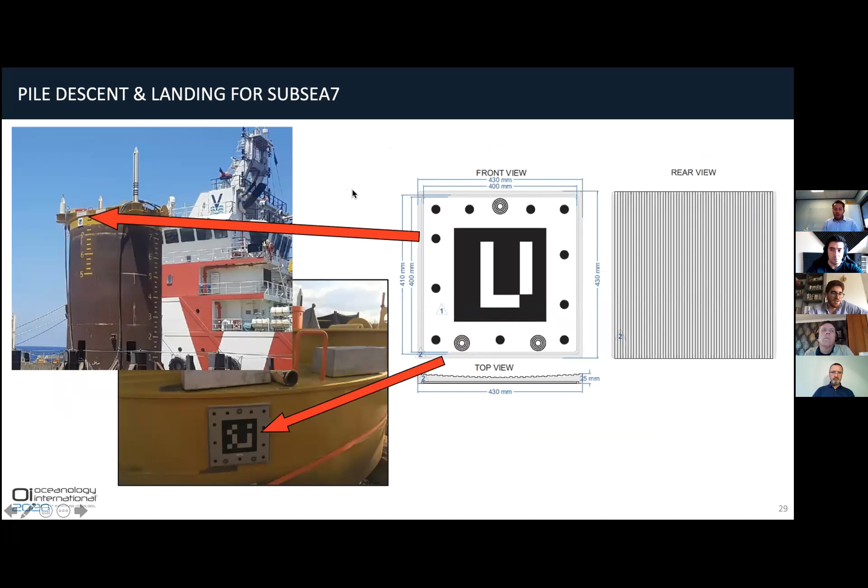So we did a few tests offshore for pile installation with Subsea 7 last year. We can measure the position and the inclination of a pile in real time with survey graded accuracies and real time. And also structure installation for TFMC still last year in the North Sea.

You can see the camera is synchronized with an external gyro. So we have the absolute inclinations of the camera every time, and as soon as the QR code is detected, we can measure in real time, embedded inside the camera, the positions of the structure.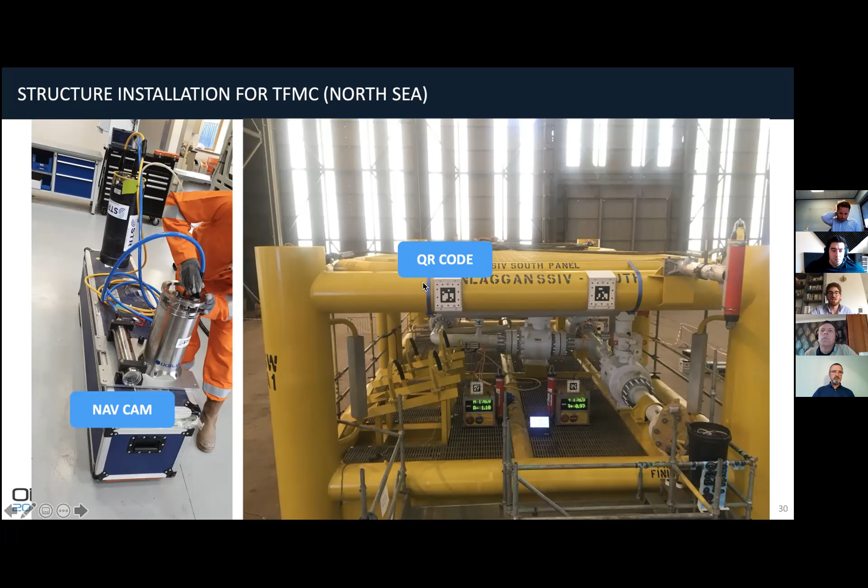So if you consider each QR code as a metrology target, knowing that you have a very precise position between the camera and the QR code, this is what typically the user screen would give. And of course, you can interface our sensor to any survey software such as NaviPac or 4DNav, QPS, or the market leaders of survey navigation software.

This positioning feedback can be used for metrologies because basically it will allow you to have fully contactless metrologies. Today, most of the metrologies use the work-class ROV that has to dock onto the structure from one structure to another, and each time it docks onto the structure, it measures the inclination of the structure.

So it takes time and of course money, but you can imagine here that our Atoll ROV uses QR codes on the structures, and of course you would have performed the dimensional control of these codes on yard right before the operation.

Yeah, this is my last slide. So basically what we are working on, and once again, it's a concept. Unfortunately, we are not able to deploy the tests, but what we are working on is deploying very light LBL arrays using sparse LBL, then put QR codes on the structures.

Let's say the cost of such operation is minimal, and use a camera and INS DVL techniques to reduce the error. This is what we would call agile metrology, combining LBL, the new techniques, latest innovation in LBL navigation, INS navigation, and visual navigation.

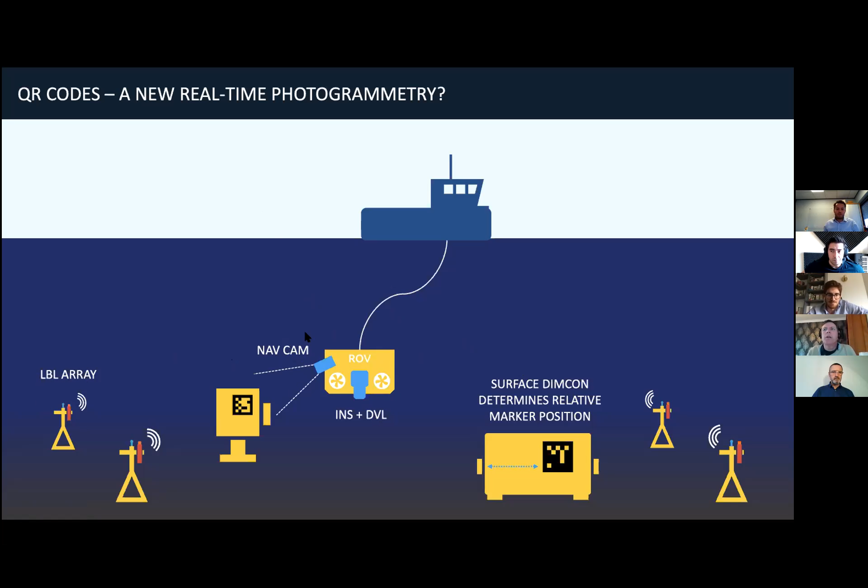I feel this is a really sensible approach of combining visual, LBL, and DVL, INS. I think this provides robustness for these sort of metrology applications. One simple question is, obviously with the QR codes, do you think we could standardize on these if they're going to be part of infrastructure? As you're probably aware, Equinor has started to put UIDs and QR codes on their equipment. I noticed you've added additional fiducials to try and improve the accuracy. But there's also a challenge with not only standardizing the QR codes, but also the detection algorithms for those codes when you start to have biofouling. It'd be interesting to give us a summary in that area.

Excellent questions, and basically you have two questions in one. The first is, yes, of course we are a very small company so we don't have huge marketing power, but clearly our ambition is for the subsea structure manufacturers to implement these codes from design and construction. Worst case scenario, this is what I love to say, it costs nothing. It's just some painting, and they're already painting letters above the valve, so why don't they paint a few QR codes on the structure? So it costs nothing.

Thank you very much, Darrell. Oh, sorry. Are you okay? It did share initially. But yeah, I think I have my second screen - it's stopped. One second. Okay, can you see my screen now? Yes, I can see it. Yeah, sorry about that.

Thank you very much. A case study for renewable titled Data-Driven Analysis for Structural Health Monitoring of an Offshore Wind Turbine.

Today my presentation will be structured in this way: I will start by mentioning the motion monitoring we carried out for an offshore wind turbine. Then I'll detail more about how we analyze the data, how we track its nature and feed it back into the finite element models, and how we use this data to integrate and calculate motions, and how they correspond in comparison to data, and all the foundation fixity to further analyze into the fatigue models and also finite elements. Finally, I will move on to draw some conclusions from this study.

I would like to express that all this study and case study was carried out in the framework of NorthStar solutions, which we provided to the oil and gas industry for combined effects of structural monitoring to reduce HSE risks and combine various data to provide one user-intuitive interface to operators of every kind. It aims to apply this existing technique, used in condition monitoring of oil and gas structures, to the renewable sector and demonstrate cost-effective applicability via economies of scale.

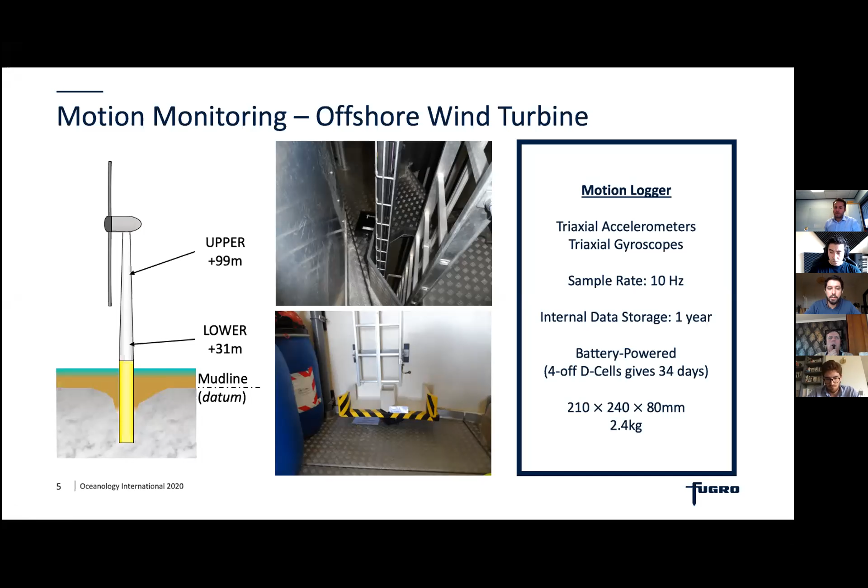If you can see on the screen, they can just be deployed anywhere. So you can actually deploy it wherever you need to carry out measurements to evaluate and have a better understanding of your offshore structure. For this case, we have installed one of them, call it lower level, at 31 meters from the mud line, and another one, upper level, at 99, to collect the motion data.

Obviously, the main implication of this one is the first blade rate. So if the scour damage further deteriorates, then the first sway mode of the scoured wind turbine can further lower down, and when it becomes operational, it may overlap, increasing the amplitude of this mode and causing potential structural damage. Operators with any suspicion about scour damage avoid operating the turbine at all costs.

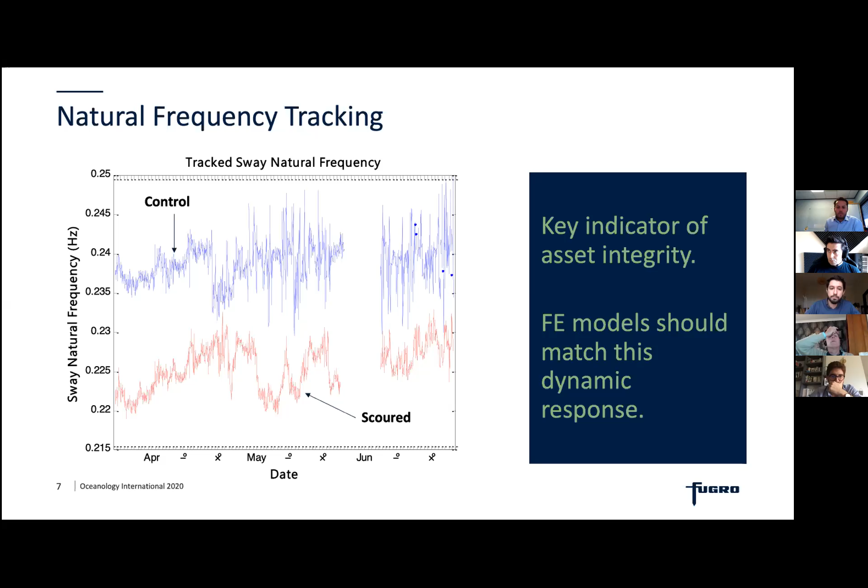But again, this is a key indicator of your asset integrity, and this is a very useful parameter for the analysts of dynamic response to calibrate their models, and that feeds into the structural model and the fatigue life predictions, so important for that purpose. Another analysis we can carry out with the motion measurements is to integrate to give the displacement and calculate the inclinations.

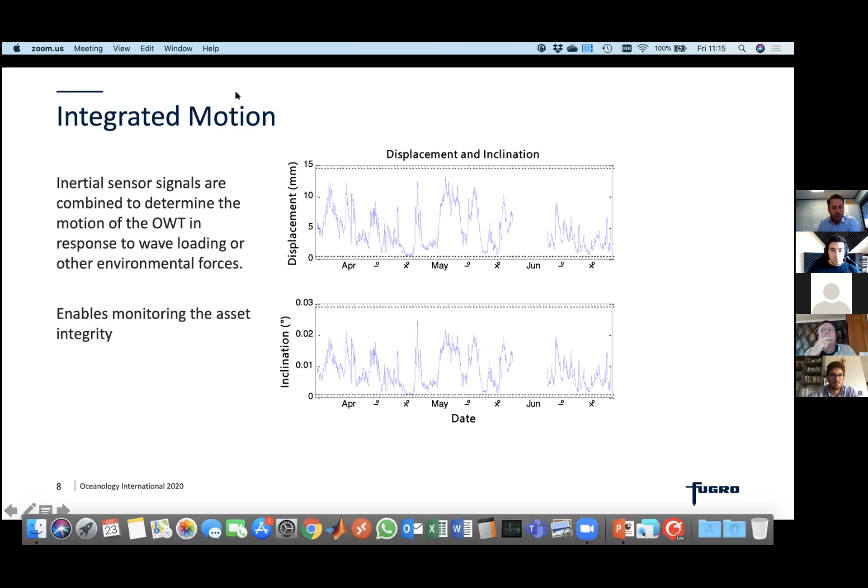You're very juddery, is it possible to turn off your video so that we can hear you a little bit better? Yeah. Hello? I can still hear you. Should I continue? Hello? Yes, we can still hear you and see your screen. Yes.

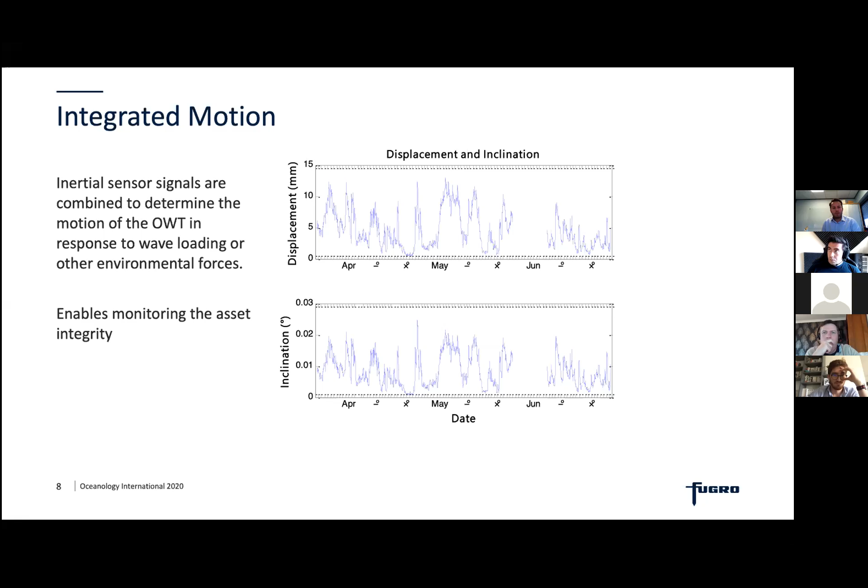So another aspect of this is the effect of metocean conditions on the first sway mode, as well as the consequent displacement of the tower to this natural frequency of the tower. So once the soil around the tower is disturbed, the motion of the tower will be much more, as we saw on the previous figure, but this also has a direct impact on the natural frequency of the tower as well.

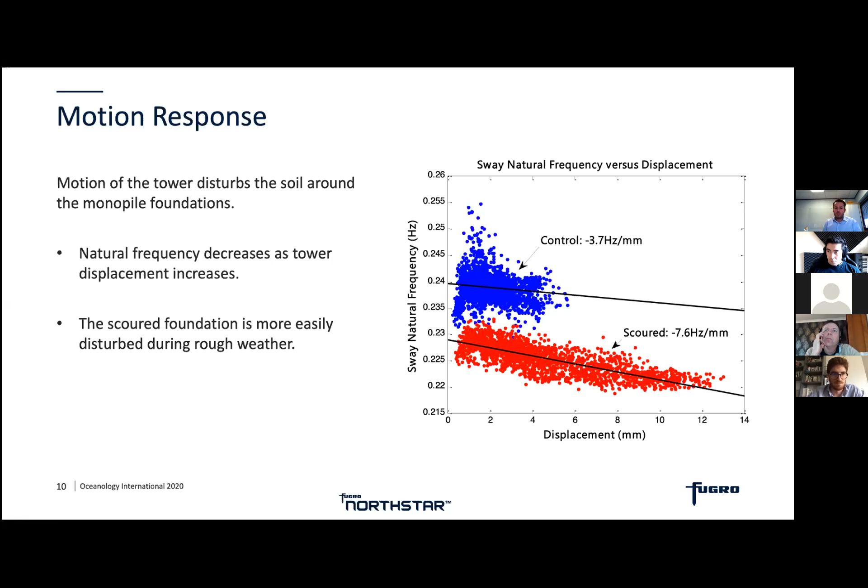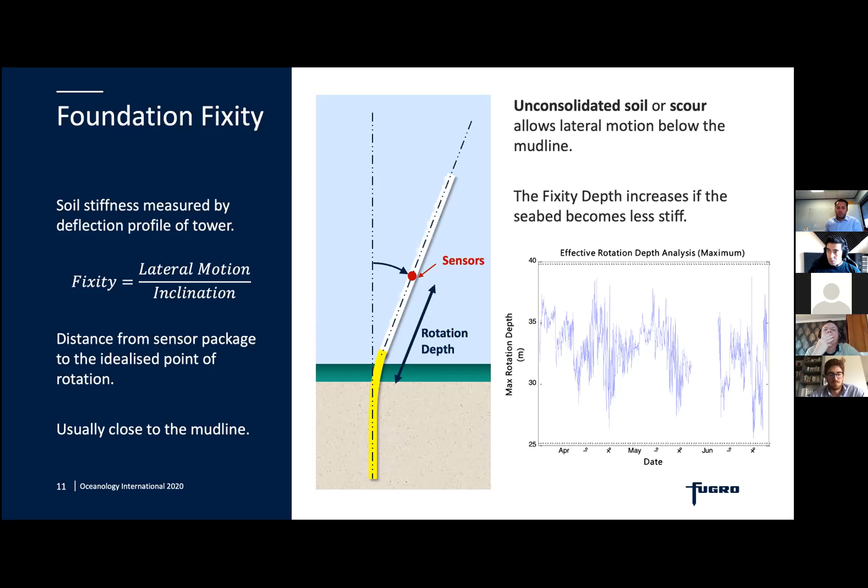So another analysis we have regularly done for other offshore structures, and risers in particular, is the foundation fixity, which is essentially the soil stiffness measured by the deflection of the tower profile. This is essentially the idealized point of rotation, generally closer to the mud line, and when the scour allows more lateral motion below the mud line, causing fixity depth.

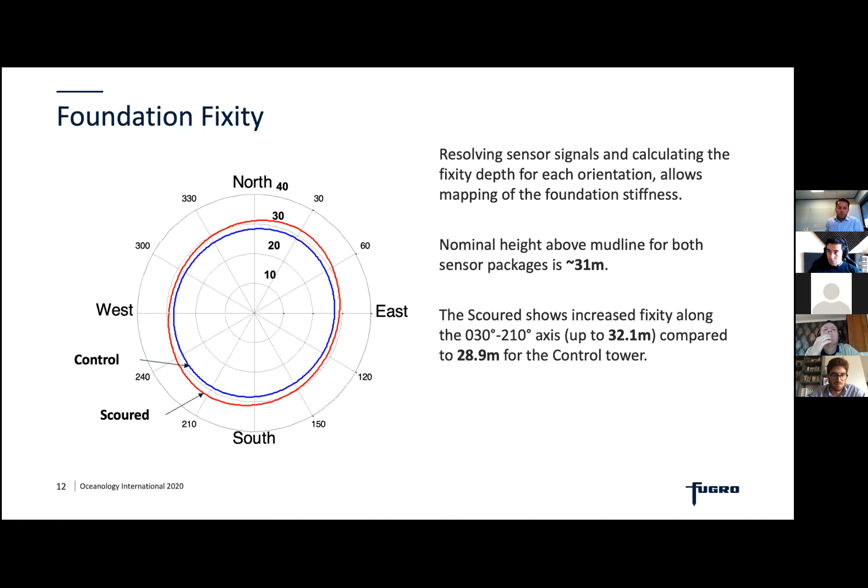Overall, this data is used to update finite element models and calibrate them to match the as-installed conditions. The easiest way to do it is to match the dynamic response, the natural frequencies and mode shapes of the tower, to the finite element models. This is the first approach. And the second way this feeds back to the structural models is updating the soil model, which essentially is assumptions about the soil model. But having access to those, it can be refined to match actual conditions.

And as an additional option, a wind farm can further instrument the tower with various strain gauges and accelerometers distributed all along the structure, to have a better understanding by calculating the bending moments and feeding them into the structural model, and to enhance the understanding of the installation for a wind farm. In return, this provides possible service life extension and additional revenue generation through the extended life.

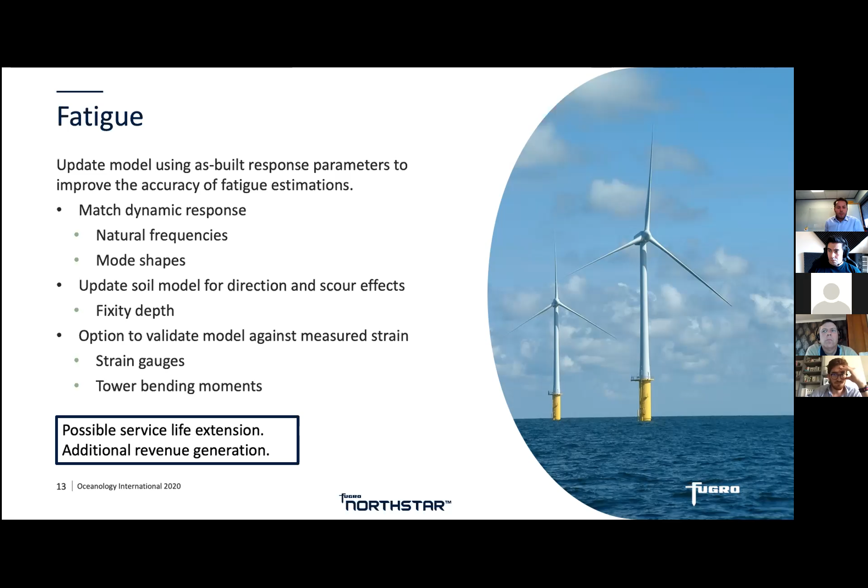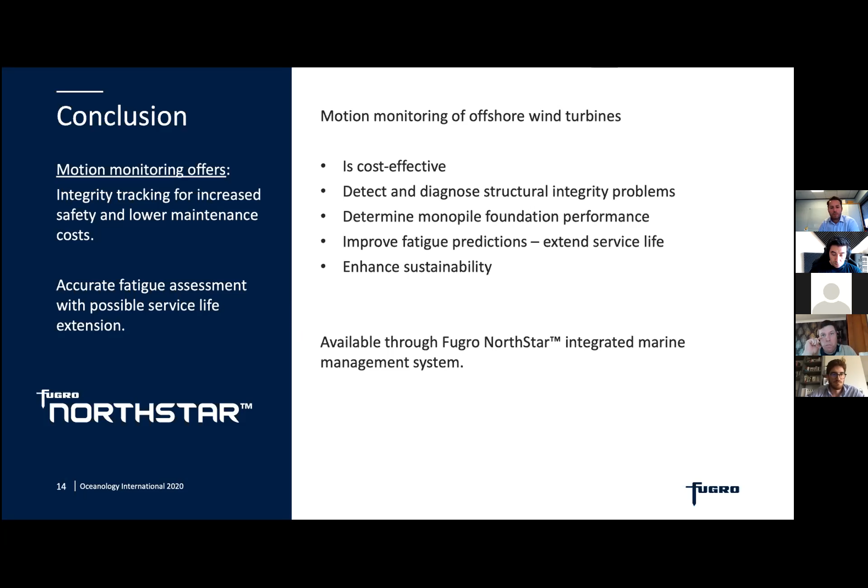So what we experienced from this case was that motion monitoring of offshore wind turbines is cost effective because of economies of scale. It aids the detection and diagnosis of structural integrity problems. When you do structural monitoring of offshore wind turbines, you can detect your monopile foundation performance, and by doing that, you can improve your simulation models and calibrate them to the as-installed conditions, which will extend the service life and reduce operational expenses via reduced maintenance. This will in return enhance the sustainability of offshore renewable energy, in our opinion. And these services are available through the Fugro NorthStar solution integrated marine management system.